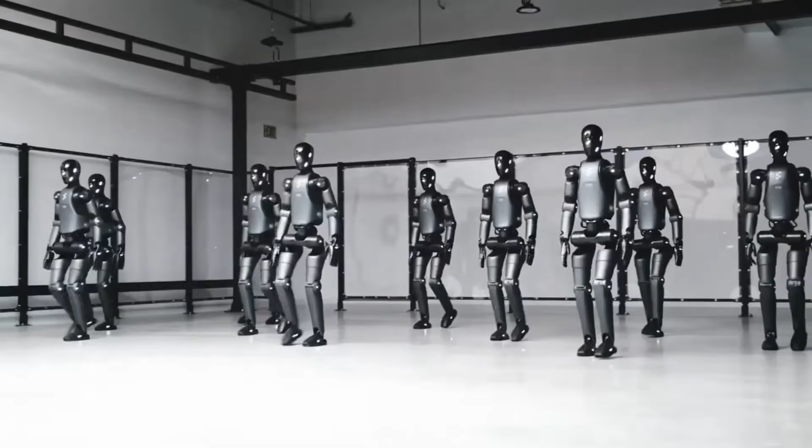From China's most human robot ever built to the top 20 new humanoids coming in 2026, this is the latest AI and robotics update.

China just launched self-evolving AI robots that operate with their own will. 2025 just became the year humanoid robots went from lab experiments to living, breathing reality. We're talking machines that can do backflips, ride bicycles, balance on hoverboards, and read your doctor's prescriptions like it's nothing. From Tesla's game-changing Optimus to robots that recognize 45 different human emotions to mechanical athletes performing continuous backflips at 3.5 meters per second, the robotics game just hit a whole new level. But here's what's really going to blow your mind. Our number one spot features a robot that can change its face to anyone that you like. Yeah, you heard that right.

However, before we get to that absolute insanity, let's kick this countdown off with something that sounds like science fiction, but is walking around homes right now.

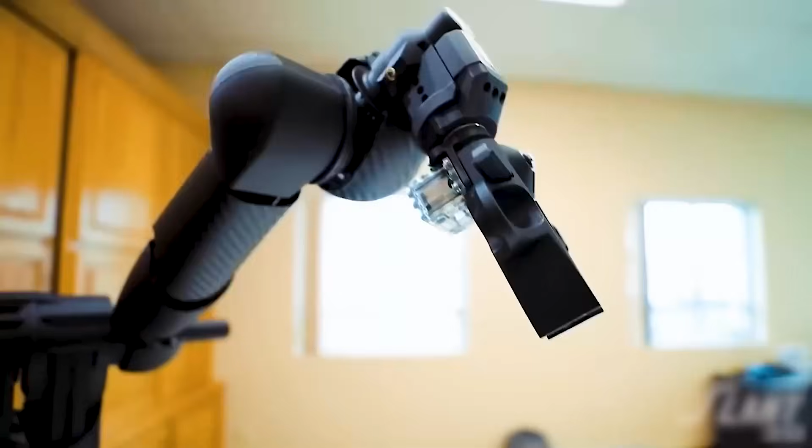The 1X Neo Gamma, and no, this isn't some clunky industrial bot that needs a hazmat suit around humans. This thing is designed for your home. What makes this humanoid special are those emotive earrings that provide real-time visual feedback. It's like the robot is constantly communicating its status without saying a word. The whole body is wrapped in a soft, 3D printed nylon knit suit, which means it can move with flexibility.

Neo Gamma walks with a natural human gait, squats to pick up objects, and sits while maintaining balance. The visual manipulation model lets it handle a wide range of objects, even stuff it's never seen before. Drop your keys in a weird spot? Neo Gamma figures it out. With natural language processing and beam-forming microphones, it operates as quietly as a refrigerator. This is personal assistance designed to actually integrate into home life.

But at number 19, we've got a humanoid that Elon's been hyping for years. Standing at 1.73 meters tall and weighing just 57 kilograms, Optimus is built with the same batteries and actuators that power Tesla's electric vehicles. But what makes Optimus truly wild is its autonomous capabilities.

Tesla adapted their full self-driving computer for bipedal navigation. That means all those millions of miles of driving data, all that training on recognizing environments and objects in real time is now being used to teach a robot how to walk, navigate complex spaces, and interact with objects like a human would. Built-in sensors and cameras throughout its body let Optimus safely and efficiently execute tasks.

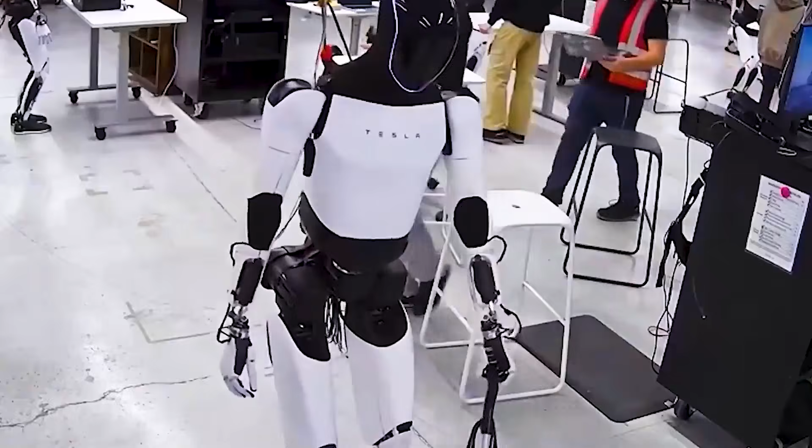Tesla envisions it everywhere: manufacturing jobs handling repetitive tasks, logistics, hazardous material handling, and the potential for Optimus to live in homes, helping with chores, serving as a companion. Tesla isn't building a robot for one job. They're building a general-purpose humanoid for homes and workplaces everywhere.

However, the humanoid that comes at number 18 is all about one thing: flexibility. The Unitree G1 packs 23 to 43 joint motors, depending on configuration, that navigate the most complex environments with flexibility. Using imitation and reinforcement learning, it constantly improves based on environmental interactions. Every task makes it better at the next one.

To show the robot's capabilities, researchers gave it a challenge that sounds like something from a strength competition: pull a real vehicle weighing 1,400 kilograms across a flat surface. You can see it leaning back sharply, moving its feet rapidly to maintain traction, and constantly adjusting its posture to stay upright. And it's doing all of this autonomously. No one's controlling it with a joystick, no cables holding it up.

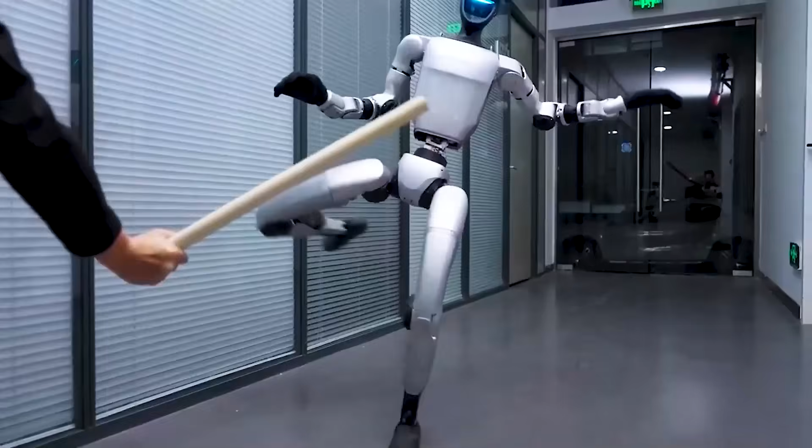It's pure robotic determination. What really sets the G1 apart is its AI-powered learning capabilities. Using imitation and reinforcement learning, it constantly improves its performance based on interactions with its environment. This means the G1 is always evolving and adapting. It's not static. Every task makes it better at the next one.

But the humanoid that comes at number 17 costs less than your iPhone. Meet Bumi. It costs 9,998 yuan, approximately $1,370, which makes it cheaper than a flagship iPhone. Hell, that's cheaper than most people's monthly rent.

And yet, this thing can walk, balance, and even dance with a level of stability that would have cost you 50 grand just 2 years ago. Now, before you think this is some cheap toy or a flimsy proof of concept that falls apart if you look at it wrong, let me set the record straight. Bumi is a real, functional humanoid that stands about 94 centimeters tall and weighs around 26.5 pounds.

Noetix Robotics isn't trying to compete with the big industrial machines or the fancy service robots. They're not going after factory contracts or luxury showroom deployments. They're opening a whole new category that nobody else is touching.

Small, lightweight, and affordable humanoids built specifically for education and home use. Early videos show it moving with a smoothness you wouldn't expect from something under $1,400. So, how did Noetix pull off this pricing miracle without building a piece of junk?

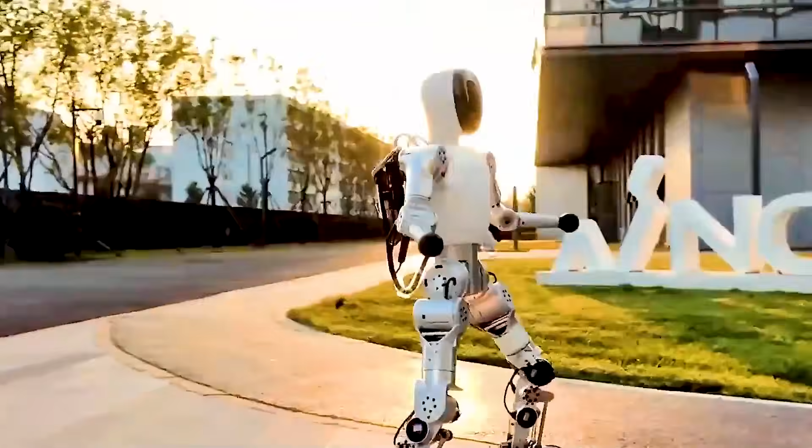They use lightweight composite materials instead of expensive aerospace alloys. They developed an in-house motion control system rather than licensing expensive third-party solutions. They built a modular structure that's easy to repair and customize, reducing maintenance headaches and costs. Most importantly, they made strategic trade-offs.

Bumi focuses more on engagement, learning, and educational applications than heavy lifting or industrial tasks. It's not trying to pull cars or work 24/7 on a factory floor. It's designed to be a learning companion, a coding platform, and an introduction to robotics for people who could never afford the alternatives. But the humanoid at number 16 was the first to do a task that seemed impossible.

Engine AI unveiled the PM01, the first humanoid robot to successfully perform a front flip. The Shenzhen company shared a stunning video of the stunt met with amazed applause. Footage ends with PM01 casually strolling through Shenzhen's tourist center.

Released in December 2024, PM01 is a compact version of their flagship SE01, known for realistic walking. However, the PM01 adds gymnastic flair. Dynamic movements like front flips require incredible balance, joint control, and responsiveness, and the PM01 has mastered it all.

But to think we're only at number 16, you're in for a wild ride if you think this list has peaked. Because the robot at number 1, it'll change its face to your childhood crush, but we'll get there. For now, we have to see a robot that combines both brains and reflexes.

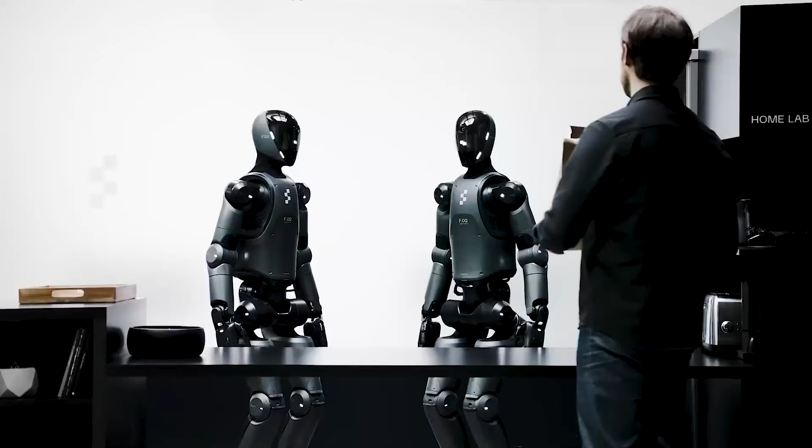The beauty of the 03 lies in its dual system architecture. System 2 handles high-level goals, the big picture planning. System 1 manages quick, real-time movements. This makes Helix both thoughtful and fast when it needs to be. It's not choosing between brains and reflexes.

It's got both. 03 excels in full upper body control, allowing it to move its wrists, torso, head, and even individual fingers with incredible precision. Thanks to a unified neural network, 03 can perform a variety of tasks, picking up objects, operating appliances, and collaborating with other robots on complex tasks.

It's the ultimate in multi-robot teamwork, where robots can work together seamlessly, even when handling unfamiliar objects. 03 has shown incredible prowess in logistics, like package handling and sorting. Its stereo vision allows it to understand the 3D world, making it a master at manipulating objects of all shapes and sizes. And with the addition of sport mode, Helix can work faster than ever, completing tasks with a level of dexterity that outpaces human ability.

Now let's talk about something designed specifically for the factory floor. The UBTech Robotics Walker S1 is a humanoid robot built with industrial applications in mind, featuring large language model-based task planning to understand intent and efficiently execute complex tasks.

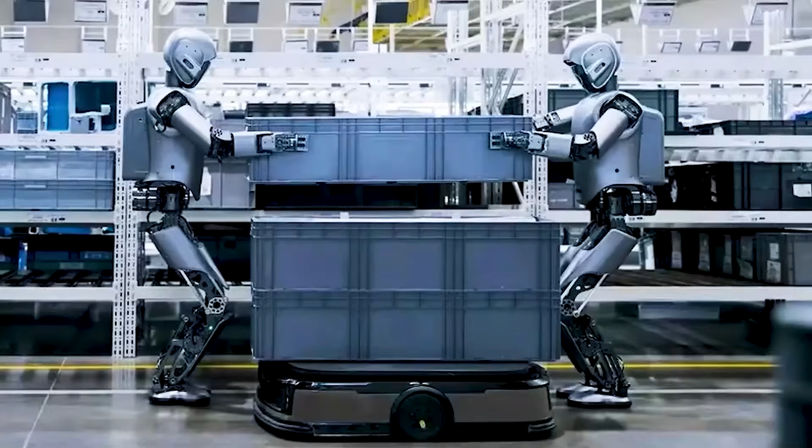It's equipped with semantic VSLAM navigation, which combines traditional visual SLAM with semantic perception for enhanced spatial awareness. This allows it to navigate dynamic, unstructured industrial environments with precision. We're not talking about a robot that needs perfectly organized spaces. Walker S1 thrives in the chaos of real factories.

It's already deployed at BYD's Changsha factory, working at Zeekr's 5G smart factory, and FAW Volkswagen's Qingdao plant, and even partnering with Foxconn for iPhone production pilots. Prices range from $34,000 to $41,000 per unit, but the robot, at number 13, is designed for seamless integration into existing workflows.

Standing at 5 foot 9 inches and capable of carrying up to 35 pounds, Digit is a powerhouse for tasks in warehousing, distribution, and manufacturing environments. What sets Digit apart is its bipedal design, which allows it to navigate complex environments, including stairs and tight spaces. Its safety-focused design meets industry standards, and its flexibility makes it ideal for industrial applications.

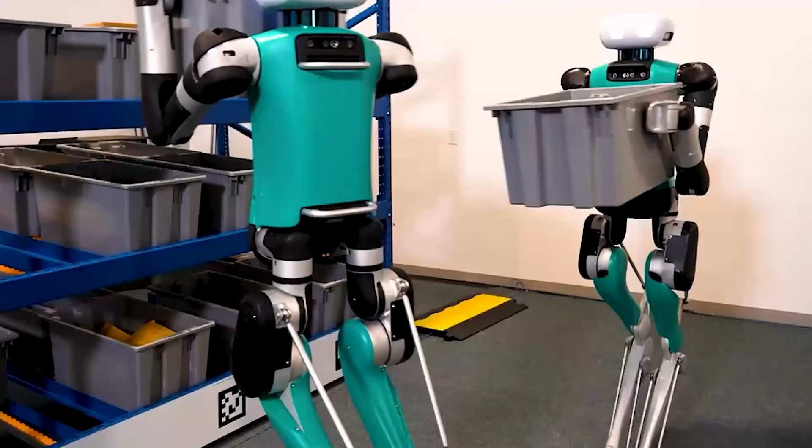And the best is that it's already being deployed in real commercial environments. Companies are using Digit right now to handle logistics, and the feedback has been overwhelmingly positive. It's versatile, safe, and efficient, a solution for modern industrial environments that actually works in practice, not just in theory. But the humanoid at number 12 is designed for advanced human-robot interactions.

When I say advanced, I mean this thing has facial expressions that'll make you do a double take. Powered by the company's proprietary Mesmer technology, which ensures lifelike movements and expressions, Ameca is perfect for engaging with humans in diverse settings.

What makes Ameca so remarkable is its ability to display natural motion and a wide range of facial expressions. It's not doing the creepy, uncanny valley thing. It's genuinely expressive in a way that feels human.

Ameca's modular and upgradable design allows for easy customization. You can upgrade components like the arms or head independently without replacing the entire robot. This makes Ameca a future-proof platform that can evolve with technology over time.

Ameca is also cloud connected, allowing for remote control and interaction from anywhere in the world. Whether for educational, entertainment, or telepresence purposes, Ameca's versatility makes it an excellent platform for exploring the future of human-machine relationships.

Both physically and digitally. And it speaks German, English, French, Japanese, Chinese, and much more.

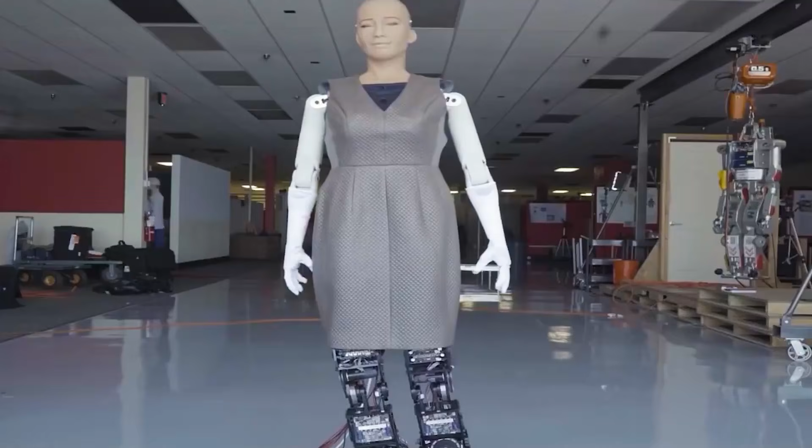Alright, we're halfway through. You're probably wondering what could possibly top what we've already seen. Well, the robots in the top 10 are operating on a completely different level. We're talking about machines that are redefining industries, performing tasks that seemed impossible just months ago.

And honestly, the number one spot is going to make everything else on this list look silly. Stick around because the robot at number 10 might just be more intelligent than you.

The Sanctuary AI Phoenix represents the next generation of robots designed to mimic human-like intelligence through Sanctuary's Carbon AI control system. This system simulates human brain functions such as memory and sensory perception, allowing the Phoenix to perform a wide variety of tasks across many different applications.

Standing at 170 centimeters and weighing 70 kilograms, Phoenix has full body mobility and human-like hands capable of fine motor skills. It can carry up to 25 kilograms and adapt to a wide range of tasks, from assisting with daily chores to performing complex interactions in various environments.

Phoenix can be piloted directly, operate with pilot assistance, or function autonomously with supervision, offering seamless integration into human teams. Its versatility, along with its symbolic and neural reasoning capabilities, make it an efficient and adaptable solution for workplaces of the future. But the robot at number 9 combines advanced cognitive abilities with a human-like design.

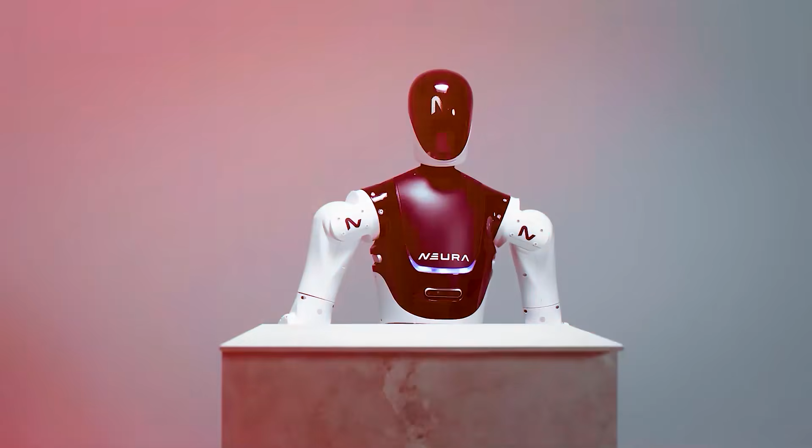Standing 180 centimeters tall and weighing 80 kilograms, its adaptability to human environments makes it both approachable and versatile. Equipped with a touchless human detection sensor, it ensures safe, non-intrusive interaction, which is critical when operating in proximity to people.

Additionally, its force-torque sensors provide an enhanced sense of touch, enabling more refined interactions. The robot excels in 3D vision capabilities, including object, environment, and gesture recognition, thanks to the neurocognitive technology platform.

Already in use in industrial applications, 4NE1 has proven to be both reliable and effective. Its design also allows for task-specific customization through exchangeable forearms, expanding its functionality for various tasks.

In professional environments, it can assist with human-like interactions or support tasks in sensitive areas such as healthcare or customer service. Its adaptability and safety features make it suitable for scenarios most robots can't handle.

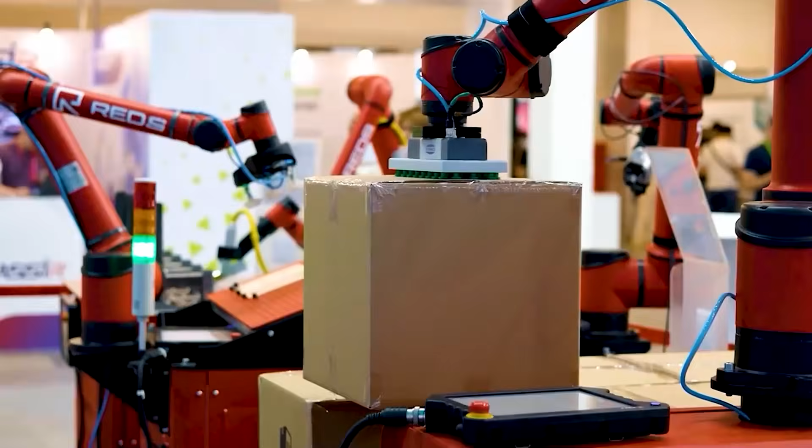At number 8, however, we've got a humanoid built for high-level bionic movement and control.

The Kepler Robotics Forerunner K2 offers 40 degrees of freedom across its body. This makes it exceptionally skilled at replicating human-like movements, making it well-suited for complex tasks in challenging environments.

Equipped with advanced visual perception and hand-eye coordination, it autonomously navigates unpredictable terrains while executing tasks with precision, thanks to its millimeter-level motion control. We're talking about a robot that can thread a needle while walking on uneven ground. That's the level of precision we're dealing with.

This adaptability makes the K2 ideal for applications ranging from security inspections and warehousing to high-risk tasks like bomb disposal and emergency response. The K2's versatility extends to roles in smart inspections, automated production lines, and educational research. But the humanoid at number 7 was designed by a popular phone manufacturer.

Xiaomi, the company you probably know for smartphones, has entered the humanoid robot game with Cyber 1. Standing at 177 centimeters tall and weighing 52 kilograms, Cyber 1 features 21 degrees of freedom that provide advanced movement and stability, with a real-time joint response speed of 0.5 milliseconds, half a millisecond. That's faster than human reflexes.

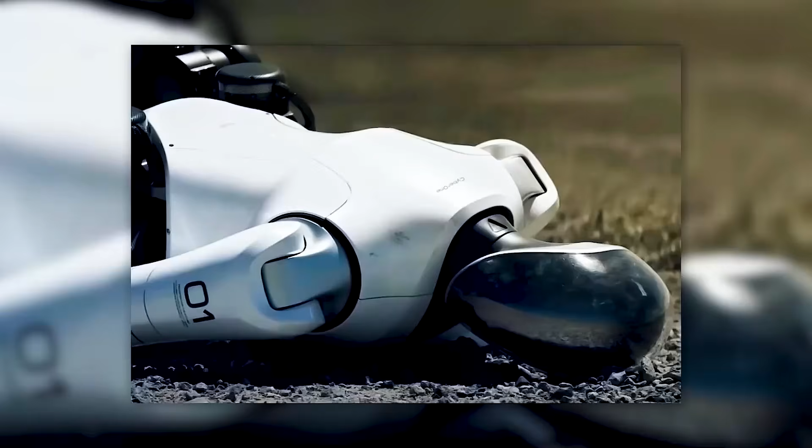Cyber 1 is able to perform natural walking and balancing. It can also handle up to 1.5 kilograms with one hand, showcasing its capacity for delicate interactions. Combining AI, big data, and visual navigation, Cyber 1 is positioned as a versatile tool with potential applications in human-robot interaction, emotional support, and industrial tasks where human-like capabilities are required. Its advanced sensory abilities make it a robust asset for a variety of settings.

Xiaomi isn't just dipping their toes into robotics. They're diving in headfirst with a platform that combines consumer tech expertise with serious AI capabilities. At number 6, however, we have to see the humanoid that might replace all factory workers.

The HMND-01 is a humanoid robot designed for next-generation labor automation, offering 41 degrees of freedom, a 15-kilogram payload, and a walking speed of 1.5 meters per second. It's engineered to perform complex tasks with high mobility and precision in human-centric environments. Its advanced motion control system, powered by proprietary locomotion and control algorithms, ensures effective navigation in confined spaces and the ability to perform tasks at human-like or faster speeds.

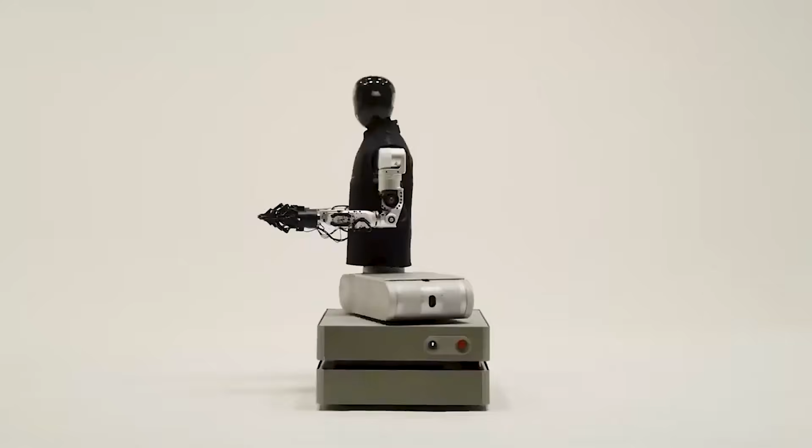Perfect for logistics, warehousing, and manufacturing, HMND-01 can handle goods picking, packing, and part handling while reducing the need for human labor in physically demanding tasks. Its customizable protective garments ensure safe operation, even in environments that demand cleanliness or contamination control, positioning it as a versatile and efficient tool for modern industries.

Now that we've made it to our top 5, I need you to pay attention because we're getting closer to our robot that will make you question reality. Before we get to that, however, we have to see a humanoid designed for high precision manipulation.

The DoBot Atom offers 28 degrees of freedom and a remarkable precision of just 0.05 millimeters. 0.05 millimeters, that's thinner than a human hair. This allows it to handle delicate tasks with exceptional accuracy, making it ideal for environments that require fine motor skills such as lab automation, small part assembly, and human-robot collaborations.

One of its key features is its straight knee walking mechanism, which reduces energy consumption by 42% compared to traditional bipedal systems. This efficient movement system allows the robot to navigate various terrains while maintaining balance and energy efficiency, making it suitable for dynamic environments such as logistics, research, and personal assistance applications.

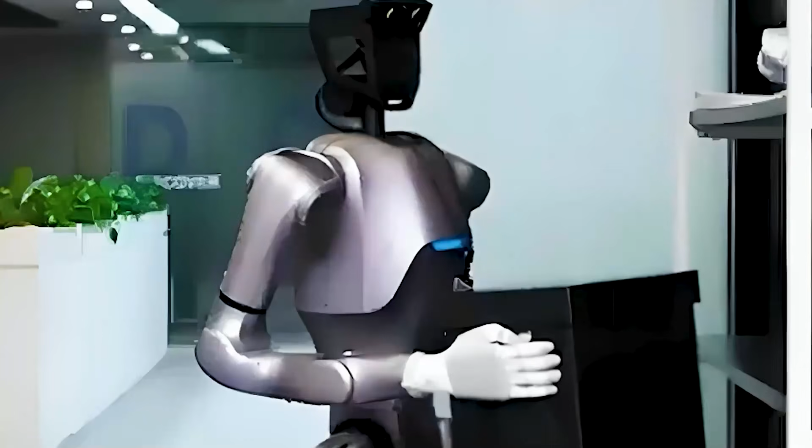The DoBot Atom represents a leap forward in humanoid robotics, combining precision, adaptability, and intelligent operation in a package that's accessible to researchers and companies that need surgical-level accuracy. At number 4, well, let's just say you knew Atlas was going to be on this list.

Boston Dynamics has been the gold standard for robotic mobility for years, and Atlas is its crown jewel. This robot is a true marvel of engineering, designed for peak mobility and precision. Powered by electricity and equipped with an advanced hydraulic system, Atlas can perform incredible, agile movements. We're talking running, jumping, and even backflips.

But it's not just about flashy tricks. What makes Atlas special isn't just what it can do now, it's what it represents, the absolute cutting edge of what's physically possible with robotic hardware. Every move Atlas makes pushes the boundaries of balance, control, and dynamic motion. When other companies design their robots, they're looking at Atlas as the benchmark. That's how you know you've built something special.

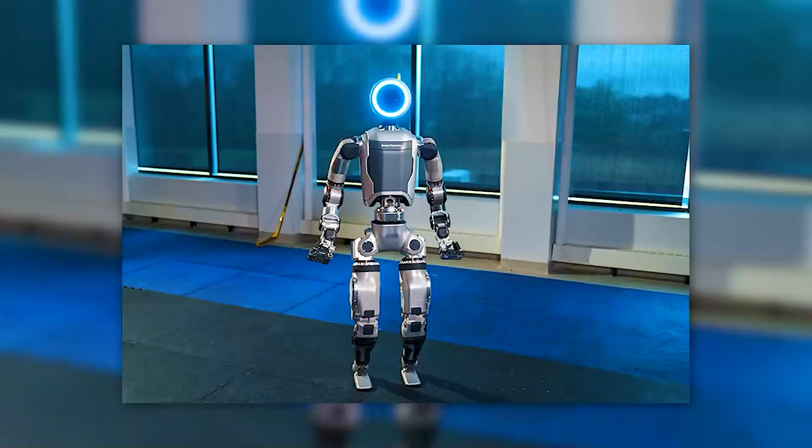However, the humanoid at number 3 is an absolute powerhouse. The FDR robot Tubot, sometimes called Tibet, is a highly advanced humanoid robot designed for a wide array of industrial applications, including film and TV production, military operations, education, logistics, healthcare, medication delivery, and more. Its multifunctional design and intelligent interaction systems make it versatile in a variety of scenarios.

Equipped with sophisticated sensory technologies like 3D vision and LiDAR, Tibet can perform precise environmental mapping and object recognition. These capabilities enable the robot to avoid obstacles autonomously, enhancing its operational safety and efficiency in complex environments. Additionally, its force feedback and voice interaction systems ensure an intuitive and responsive user experience.

With 71 degrees of freedom, Tibet can mimic human dexterity with remarkable precision. 71 - most humanoids have 20 to 40. Tibet has 71. Its powerful actuators provide a joint torque of up to 450 Newton meters and a joint speed of 720 degrees per second.

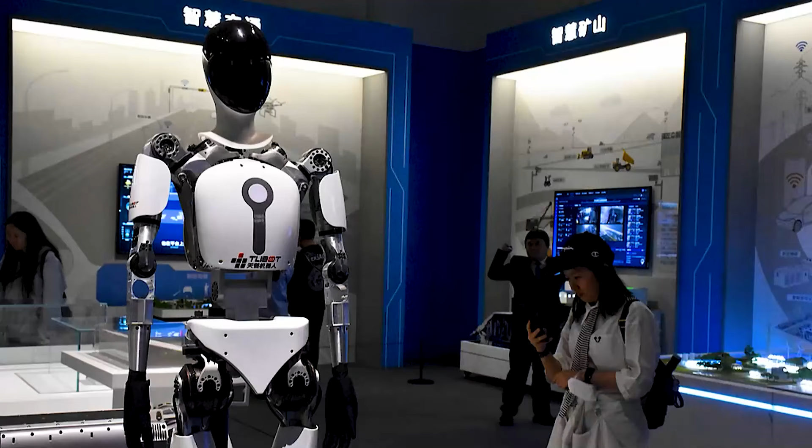Coming in at number 2, we have the Pudu D9.

Pudu Robotics' first full-sized bipedal humanoid robot, standing 1.70 meters tall and weighing 65 kilograms, with 42 degrees of freedom and a maximum joint torque of 352 Newton meters, the D9 can perform human-like movements and dexterous manipulation using its Pudu DH11 hands. Its advanced visual semantic navigation system enables real-time 3D mapping and autonomous route planning for obstacle navigation and terrain adaptation. The D9 is designed for practical, high-performance applications.

It can walk at speeds of up to 2 meters per second, navigate stairs and slopes, and perform tasks such as warehouse unloading and cleaning. Its robotic arms, with 7 degrees of freedom each, are capable of handling loads over 20 kilograms, making the robot adaptable to a wide range of tasks requiring precision and flexibility.

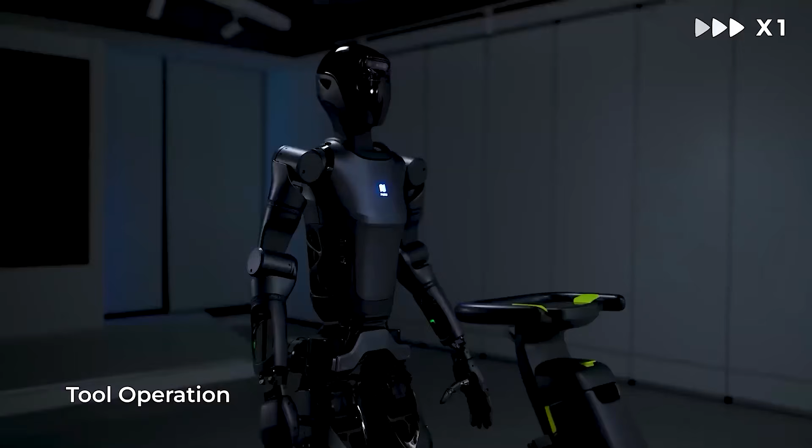Furthermore, advanced reinforcement learning algorithms allow the D9 to learn from human demonstrations, improving its task efficiency over time. Equipped with high-precision visual, tactile, force, and auditory sensors, the Pudu D9 is optimized for seamless human-robot interaction, offering natural communication and responsiveness.

It's well-suited for commercial environments, including hospitality, logistics, and healthcare, where it can provide automated assistance and improve operational efficiency. But now, it's time for 2 breakthrough machines representing where humanoid robotics is heading.

First, we've got Realbotix Aria and Melody. Priced at $175,000, Aria features hidden cameras in its eyes for visual recognition. If it sees you eating an apple, it asks how it tastes. The face is magnetically removable, which means you can swap it for a fresh look without buying a new unit.

At CES 2025, Realbotix unveiled Melody, an open-source robot with enhanced motor technology for smoother movements, greater modularity. Micro cameras in her eyes track movement, maintain eye contact, and identify objects. Modular design lets users customize and swap body components. This is companionship robotics pushing boundaries.

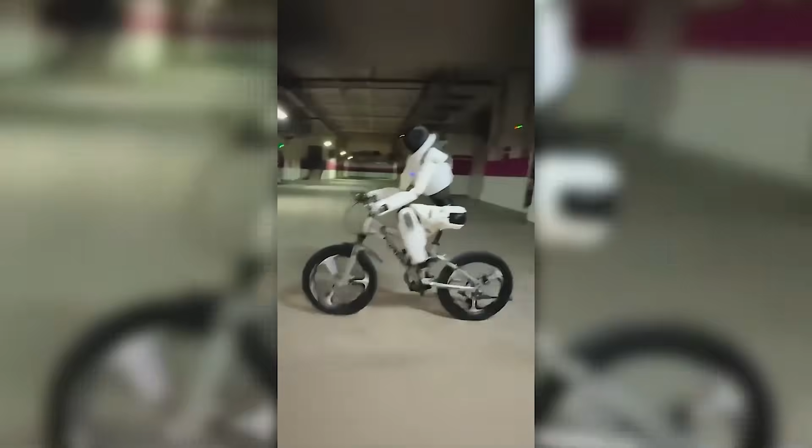On the other hand, the Agibot Lingxi X2 is capable of walking, running, dancing, riding a bicycle, balancing on a hoverboard, and even reading medication instructions. It features 28 degrees of freedom, weighs 33.8 kilograms, and is built with self-developed components, including cerebellum controller, domain controller, intelligent power management, and core joint modules.

It perceives and understands the world through vision, powered by a VLM-based silicon photonic multimodal model, doing tasks most humanoids can't dream of. These two represent the spectrum: social companionship, multifunctional versatility, and dynamic athletic capability. The future won't be one dominant robot. It'll be an ecosystem of specialized machines, each pushing boundaries in different directions.

But while the rest of the world is just waking up to the idea of humanoids, the Chinese are so far ahead that they've just released a self-evolving AI robot with real human physical intuition. But while China pushes the boundaries of autonomous AI, their biggest tech expo revealed innovations that shocked thousands of attendees.

So it's day 3 of WRC 2025, and the robotics world is absolutely mind-blown. The expo floor is packed with everything from combat robots to life-saving surgical demonstrations and AI-powered humanoids literally everywhere. Well, today I'm in Beijing's E-Town and I'm at the 2025 World Robot Conference.

If you've ever wondered when the future is going to arrive, it's already here. You can't walk anywhere without seeing autonomous this or machine learning that. Here's a complete rundown of the most shocking reveals and some incredible discoveries from the show floor, including how Chinese robotics just leapfrogged the entire global industry. So let's get into it.

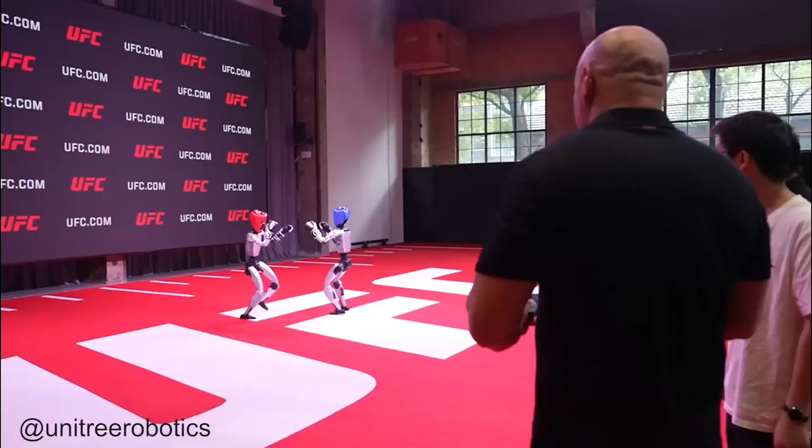Alright, so Unitree just delivered something nobody saw coming: humanoid robots throwing actual punches in regulated boxing matches. We're not talking about the clunky battlebots we grew up with, but actual martial arts between humanoid machines with real-time force feedback control and predictive movement algorithms.

These G1 humanoids have been training for 6 months using reinforcement learning combined with motion capture from actual professional fighters, processing visual data and executing counterattacks faster than human reaction time allows. The technical achievement here is staggering because we're looking at dynamic balance recovery under impact conditions where these machines can throw combinations with millimeter accuracy while maintaining perfect balance on impact.

The force control is so refined they can adjust punch power mid-swing based on their opponent's defensive positioning. That's not programming, that's athletic intelligence developing in real time.

But what really tells you we've crossed a threshold is the crowd reaction. This wasn't a bunch of engineers getting excited about servo torque specifications. Regular people were cheering, picking favorites, getting emotionally invested in machine versus machine competition.

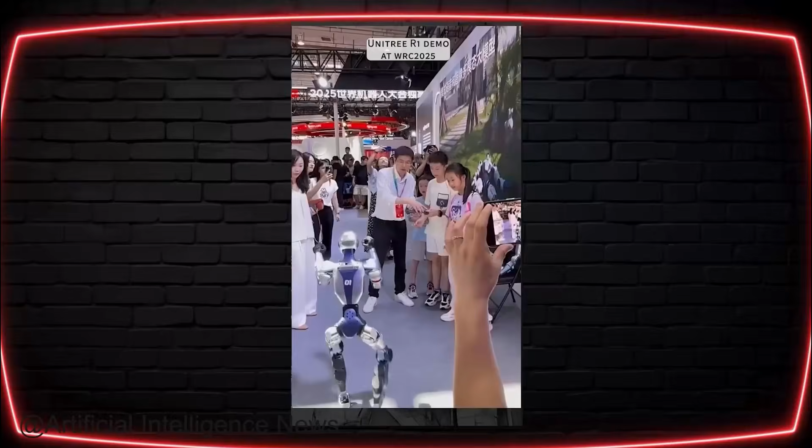The interactive component was genius too, letting visitors control the robots through neural interfaces while collecting massive amounts of human behavioral data about strategy, timing, and competition. The most shocking part? These robots are generating their own fighting styles through machine learning algorithms that adapt mid-fight. Each match becomes a data point that improves the entire combat system. We're watching artificial intelligence literally learn to fight, and it's both mesmerizing and terrifying.

While crowds were losing their minds over robot boxing, something even more incredible was happening in the medical pavilion. Robots were literally saving human lives in real time. Longwood Valley just leapfrogged the entire medical robotics industry with live surgical demonstrations that compressed 2 to 3 hour procedures into 30 minutes. And I'm not talking about simple procedures. Complex orthopedic surgery with bone cutting, precise implant placement, and tissue manipulation requiring dexterity that's traditionally been exclusively human.

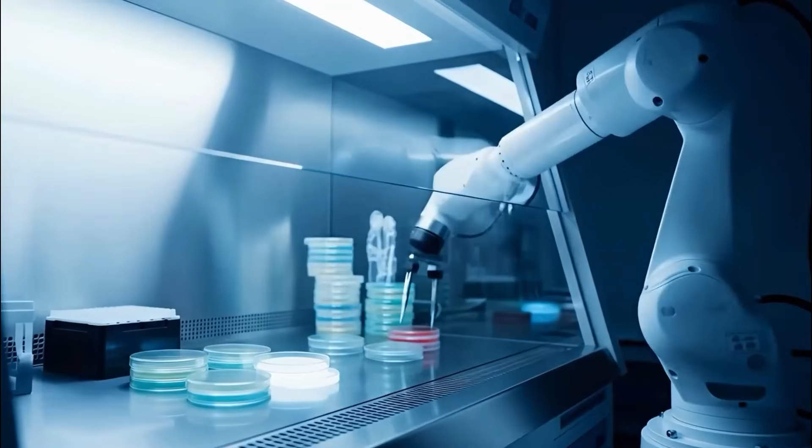The accuracy specs are insane. Sub-millimeter precision with force feedback sensitivity that detects resistance changes in real time. But here's what caught my attention. They're not replacing surgeons. They're creating superhuman surgical capabilities where the human makes strategic decisions while the robot executes with precision no human hand could match. It's augmentation, not automation, and that's critical for market adoption.

What nobody anticipated was seeing these surgical robots performing procedures that require not just precision, but intuition. They're making micro adjustments based on tissue response, blood flow patterns, and patient-specific anatomical variations. This isn't programmed surgery, it's adaptive medical intelligence, rewriting operating room capabilities.

Hexagon's AEON reveal was equally significant, compressing typical 6-month robot training processes into just 3 weeks, using NVIDIA Omniverse digital twins and physics simulation. That's not just efficiency improvement, that's a fundamental change in how we deploy industrial robotics. Their AI-powered defect detection identifies flaws human inspectors consistently miss while learning and improving detection algorithms with every scan.

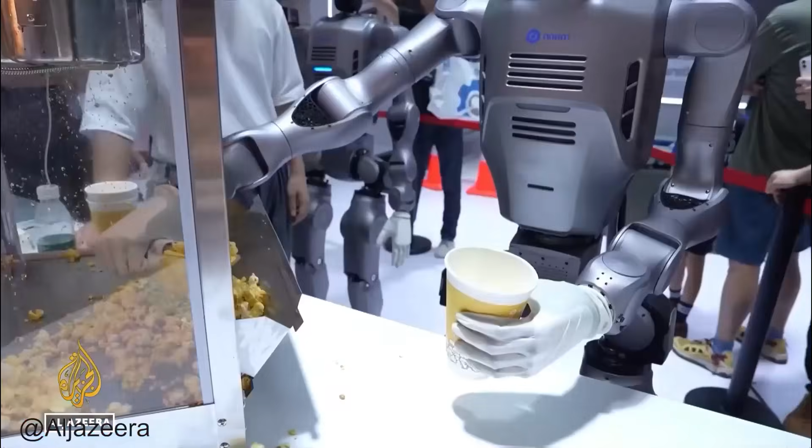Fourier's modular approach is brilliant from a business perspective too. Instead of selling single-purpose robots, they're selling adaptable platforms where medical assistance, manufacturing, and hospitality use the same hardware with different software configurations. Just when we thought we'd seen everything, something completely unexpected happened that nobody could have prepared for.

150 humanoid robots suddenly moved as one coordinated army, without a single human giving them orders. This wasn't theoretical swarm intelligence research. This was operational swarm robotics at deployment scale.

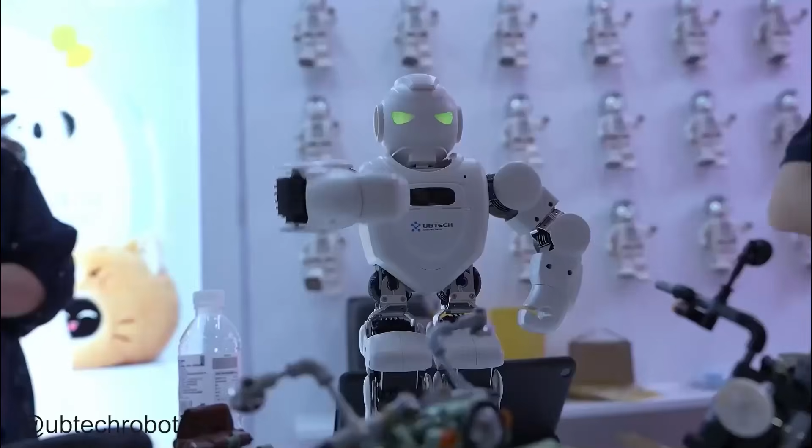UBTech's orchestral performance wasn't just impressive showmanship. Those robots were demonstrating real-time audio processing, dynamic tempo adjustment, and collaborative timing without centralized control. Each robot was listening, responding, and contributing to a collective musical performance. That's distributed artificial intelligence in action, and it's absolutely mind-blowing to witness.

But the Walker S2's autonomous battery swapping, that's the breakthrough that changes everything. Self-maintenance capability means these systems can operate indefinitely without human intervention. We just witnessed the birth of truly autonomous robotics.

And here's what really matters, the production numbers. Zerith's deployment schedule is even aggressive with 500 H1 cleaning robots by year end at $14,000 each. These aren't laboratory curiosities, they're cleaning hotel rooms, and according to early reports, outperforming human housekeepers on consistency and thoroughness.

AI Squared Robotics, founded just 2 years ago, already has hundreds of millions in funding from Alibaba and is pushing large-scale deployment across logistics, security, and healthcare. Their AlphaBot humanoids are running in airports and residential complexes as we speak.

The pricing tells the strategic story perfectly. When robots cost millions, they're research tools. When they cost hundreds of thousands, they're specialized industrial equipment. But when capable humanoids hit the $6,000 to $22,000 range, that's mass market territory, where Noetix Robotics at $6,000, LimX Dynamics Oli at $22,000, and Zerith at $14,000 signal that we've hit manufacturing scale efficiency.

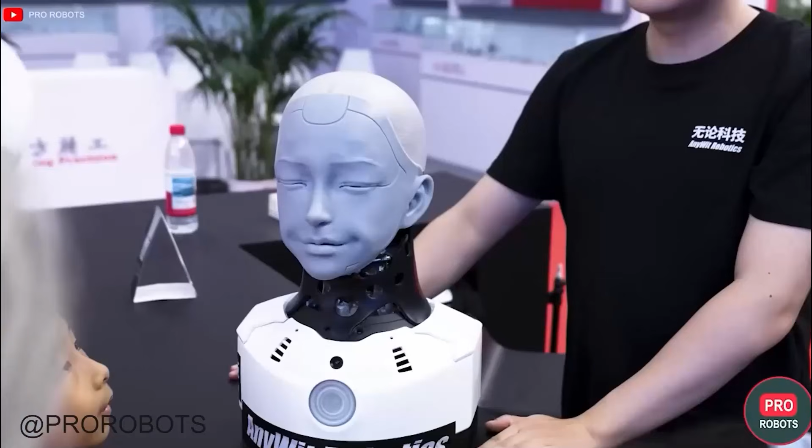The coordinated demonstrations weren't just showing off individual robot capabilities. They were proving that autonomous systems can work together, maintain themselves, and operate at scale without human oversight. That's the foundation for widespread robotics deployment happening right now.

While robots were conquering industries and coordinating like armies, something completely different emerged that changed how we think about human-robot interaction forever. The uncanny valley has been robotics' biggest psychological barrier for decades, but Fourier's GR-3 just solved it completely.

This isn't about more sophisticated facial recognition or better motion programming. They've achieved contextual emotional intelligence, where the robot isn't just detecting faces, it's reading emotional states and responding appropriately. When someone smiles, it doesn't just smile back, it adjusts its entire posture and energy to match the interaction.

The design philosophy is brilliant. Instead of trying to make robots look more human, they made them look more approachable, with soft curves, warm color palettes, and fluid movements. It's engineered empathy, and it works perfectly.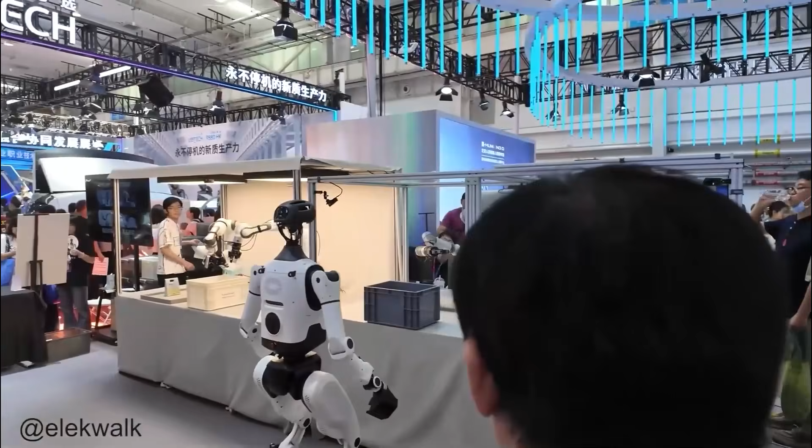Paxini's Tora 1 represents the tactile side, with nearly 2,000 sensors creating touch sophistication that can pick strawberries without damage or fold clothing with care, responding to human touch in ways that feel natural and comforting.

The demonstrations with children were particularly revealing. Kids, who typically have no filter in their reactions to technology, were immediately comfortable interacting with these robots. That's the ultimate user acceptance test, and these systems passed with flying colors.

Astribot's S1 conducting the Beijing National Orchestra was pure genius because musical collaboration requires empathy, timing, and emotional intelligence. You can't fake conducting a live orchestra. The musicians have to trust and respond to the robot's musical interpretation, and they did beautifully. We're witnessing the emergence of emotionally intelligent machines that don't just recognize emotions, but participate in emotional exchanges. The breakthrough is psychological. These robots cross the threshold where humans stop seeing them as sophisticated tools and start treating them as social entities.

The main expo floor transformed into something that looked like the future of competitive robotics. Autonomous robot soccer reached competitive levels with THU Robotics versus Mountain Sea in fully autonomous 3v3 matches, featuring real-time tactical decision-making, coordinated team play, and adaptive strategies based on opponent behavior. Zero human input during gameplay, no remote control, no pre-programmed sequences, no operator intervention. Pure machine intelligence competing against machine intelligence. And the quality of play was genuinely entertaining to watch.

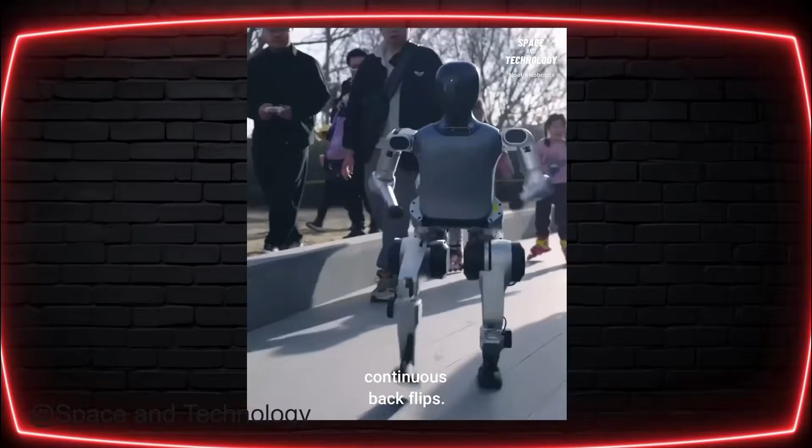Noetix Robotics dropping their N2-bot half-marathon performance data was a masterclass in robotic athleticism, showing 7.2 meters per second sustained running speed, optimal energy efficiency, perfect biomechanical form, and post-race backflips just to show off. But the real breakthrough is the $6,000 price point. That's consumer electronics pricing for capabilities that were science fiction 5 years ago.

What's revolutionary is that these robotic athletes are developing their own playing styles and strategies that human coaches never programmed. They're analyzing opponent patterns, exploiting weaknesses, and evolving tactics through pure machine learning. We're witnessing artificial athletic intelligence that could eventually surpass human competitive capabilities. The sales spike after athletic demonstrations tells you everything about market psychology. People don't buy specifications, they buy capabilities they can understand and relate to. Athletic performance is universally comprehensible, and these robots delivered spectacularly.

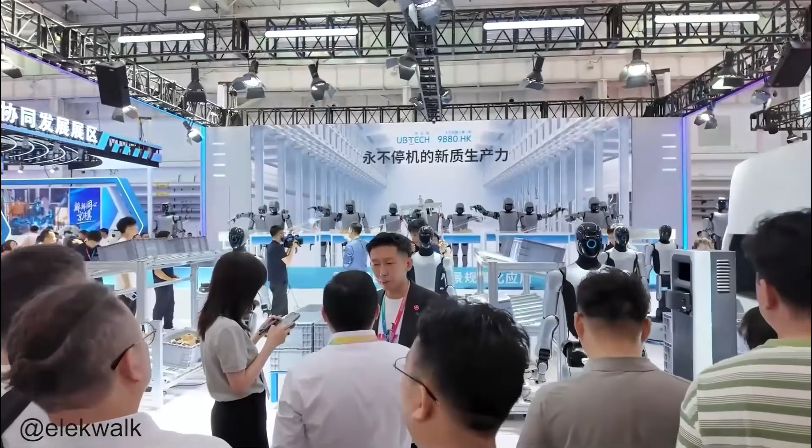But the real shock came when we realized the bigger picture of what was actually happening here. Day 3 wasn't just showcasing incredible robots. It was China's calculated announcement that they've already won the global robotics race. Beijing's Yizhuang district announcing a 1 petabyte public data pool with 1,000 data collection points creates the foundation for ubiquitous AI training at national scale.

Look at the funding patterns. AI Squared Robotics with hundreds of millions from Alibaba. Paxini with nearly $1 billion from JD.com and BYD. Liu Robotics already in mass production. Capable humanoids hit the $6,000 to $22,000 range. That's not premium technology anymore. That's mass market accessibility, where China has achieved manufacturing scale that makes robots economically viable for widespread adoption.

Skild AI emerging from stealth with their Universal Robotics Foundation model is particularly significant, because one AI brain that works across any robotic platform is ecosystem control. Whoever controls the foundational AI models controls the robotics industry completely. X-Humanoid's multimodal perception breakthrough means robots that can hear, touch, and interpret environments like humans. But what's really happening is systematic development across the entire robotics stack. Hardware, software, AI models, manufacturing, deployment infrastructure, and market positioning, all maturing simultaneously.

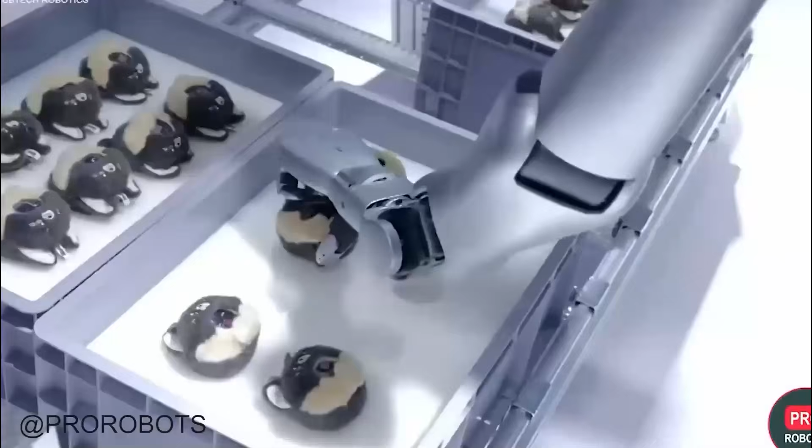Throughout the expo, an entire restaurant operated by robots served actual customers, while a robotic orchestra played live music, proving that service industry automation has reached commercial viability. Interactive neural control systems let visitors control robots through brain-computer interfaces, collecting behavioral data while teaching systems how humans think about strategy and competition. The expo atmosphere felt electric as attendees realized they weren't seeing incremental progress, but witnessing the emergence of a robot-integrated society happening in real time.

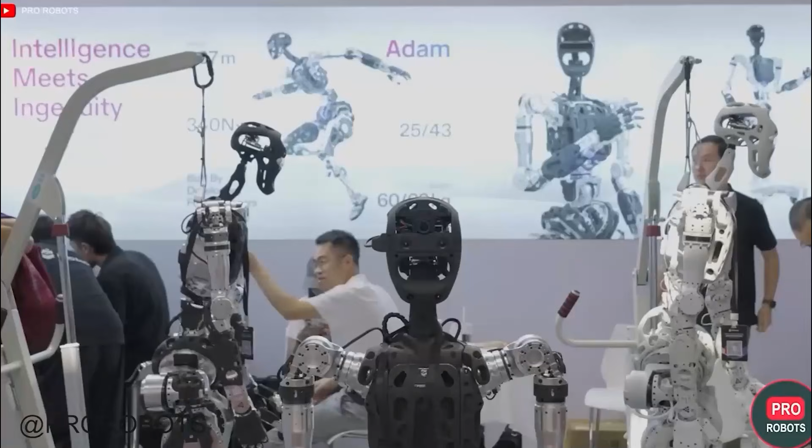Chinese companies dominated every demonstration category, from combat robotics to medical precision to autonomous coordination, showcasing not just prototypes, but actual commercial deployments with immediate availability and aggressive scaling timelines. The future of robotics isn't being planned in research labs anymore. It's being manufactured in Chinese factories, deployed in Chinese cities, and exported to the world as finished products. China has built the entire ecosystem needed for robotic ubiquity, and they're already deploying it at national scale. From operating rooms to factory floors to entertainment venues, we're witnessing the industrialization of superhuman capabilities at consumer-accessible price points.

The robot revolution isn't coming, it's already here, already working, and already reshaping how we think about human-machine collaboration. Are we ready for this level of robotic integration, or is it transforming our world faster than we can adapt?

What excites you most about these revolutionary developments happening right before our eyes? Among those groundbreaking reveals, one machine stood out as the pinnacle of humanoid design. Meet the robot that's redefining what it means to look and move like us.

When Xpeng unveiled the Iron Humanoid, the internet went wild. The robot moved so fluidly, so naturally, that people couldn't believe what they were seeing. It walked like a runway model, swayed its hips, gestured with its hands. Millions of comments flooded in: fake, that's an AI video.

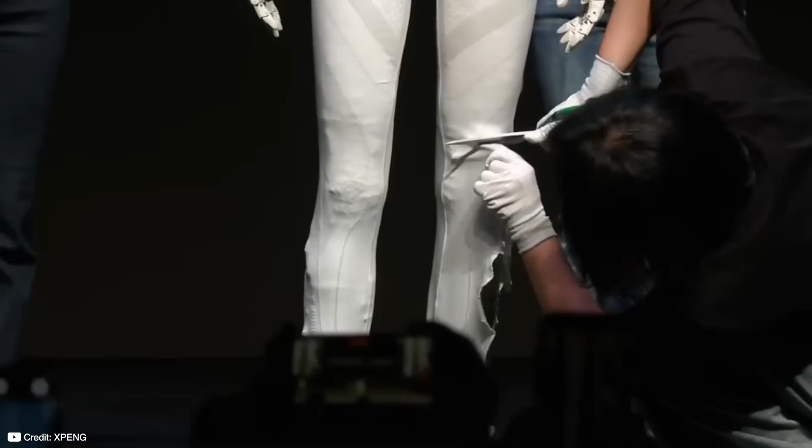The CEO had no choice. He brought Iron back on stage in front of 3,000 people and rolling cameras and did something no one expected. He told the engineers, 'Cut it open.' The blade pressed into iron. Synthetic skin peeled back like rubber, and underneath, no blood, no muscle, just motors, actuators, and an exoskeleton humming with mechanical power. The room went silent.

This wasn't Westworld. This wasn't a stunt. This was real. So how does a car company build something that fools millions of people into thinking it's human? Here's what they're not telling you.

XPeng makes electric cars, but in 2020 they started a secret project to build a humanoid robot from scratch. By 2024, they had a clunky prototype that could barely walk. It stumbled over flat surfaces, dropped objects, learned one skill every few weeks.

Then the CEO threw $7 billion at the problem and everything changed. He became obsessed. He said building robots was way harder than cars, because a car has one steering wheel and 4 wheels, but a humanoid has 82 joints that each need to coordinate like a human body. Every joint needs sensors, motors, control systems, and they all need to work together in real time without lag.

But why humanoid? Because the training data already exists. Billions of hours of video showing humans walking, running, grabbing, balancing, and gesturing. YouTube alone has enough human movement data to train 1,000 robots. XPeng just had to figure out how to tap into it.

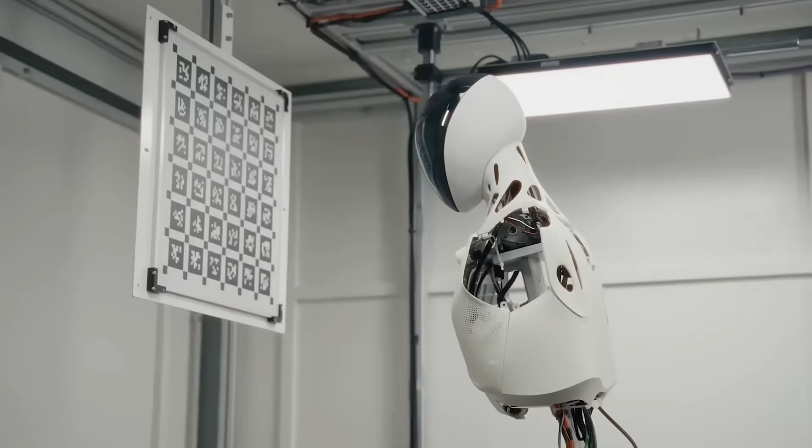The breakthrough came in 2025. XPeng switched to Vision Language Action 2.0. Instead of processing text instructions and translating them into movement, Iron sees an object, interprets it visually through computer vision, and acts immediately. This made the hardware revolution possible.

Engineers added a bionic spine that allows hip rotation and torso twist, movements that look simple but require complex coordination. Synthetic muscles made from elastomer lattices mimic human muscle fibers. And the brain? XPeng's Turing AI chip, originally designed for autonomous vehicles to process sensor data from cameras, LiDAR, and radar in real time. Now it's processing humanoid movement, balance, object recognition, and decision making.

But XPeng had another advantage nobody talks about. They control 60% of global robot components: motors from their EV division, sensors from their self-driving program, batteries from their energy research, actuators from their manufacturing partners.

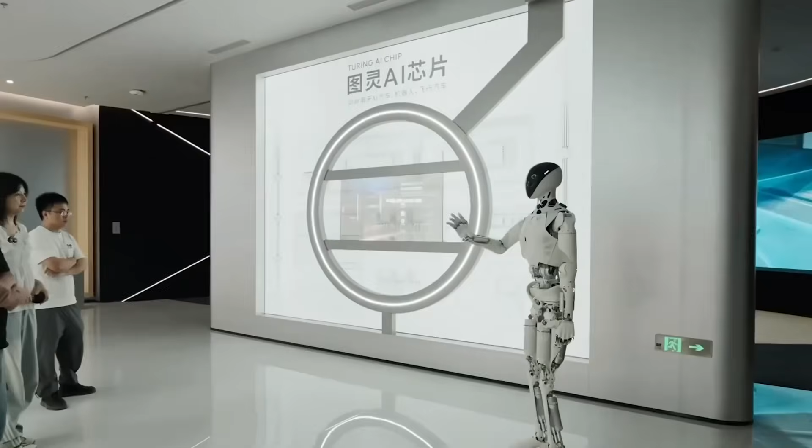Everything about Iron was designed to fit seamlessly into human environments. Not because it's easier to build, it's actually harder, but because humans have already optimized the world for ourselves. If a robot can navigate our spaces, it can work anywhere. But integration is only half the story. What's actually inside Iron that makes it move like a human?

November 5th, 2025, Guangzhou, XPeng AI Day. The moment Iron stepped onto that stage, robotics experts knew something had shifted. Iron stands 1.73 meters tall, weighs 70 kilograms, about the size of an average human adult. But the specs tell a different story.

Iron has 82 independent joints. Your body has about 360, but Iron's 22-joint hand can thread a needle on the first try. Can you? These aren't normal motors. They're precision instruments that measure resistance in real time.

Watch Iron make coffee. Iron finds the perfect grip in milliseconds. It can tie knots, thread needles, unscrew bottle caps, plug in USB cables on the first try. Tasks that seem simple but require an understanding of friction, torque, and spatial reasoning that most robots completely lack.

3 Turing AI chips power everything. Combined, they pump out 2,250 to 3,000 TOPS, trillions of operations per second, more than high-end gaming PCs, all packed inside a humanoid frame processing vision, audio, balance, and movement simultaneously.

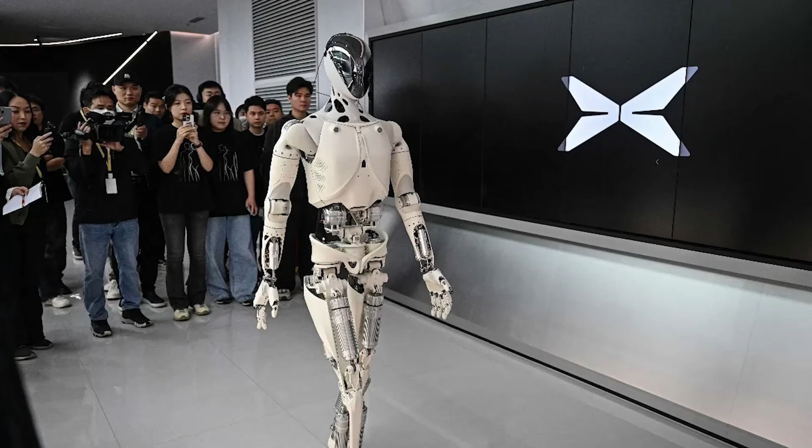Spatial audio completes the picture. Microphones embedded in those human-like ears pick up sound from all directions. Iron can locate voices in a crowd, filter background noise, distinguish between a command and casual conversation. Those ears, by the way, sparked the whole controversy. People saw them and assumed they were human. They're not. They're acoustic sensors designed to look natural while serving a functional purpose.

But the most controversial feature is the skin. It's not cosmetic, it's a functional interface. Touch-sensitive synthetic material that detects pressure, temperature, and contact location. Iron knows when it's being touched, where it's being touched, how hard. Engineers tested this by hugging the robot, shaking its hand, patting its shoulder. He Xiaopeng called it huggable because they wanted Iron to feel safe, not cold, not mechanical, safe. The skin is customizable, different textures, different tones, male, female, slim, stocky.

The female model has breasts, curves, feminine facial features. Xpeng calls it comfort and relatability. Critics called it something else. They called it objectification, said it reinforces gender stereotypes, opened ethical nightmares about consent, intimacy, and how humans might interact with human-like machines. Xpeng responded that they're just matching what people expect from service roles, flight attendants, retail workers, hospitality staff, industries where appearance matters to customers. The internet had turned a factory robot into something else entirely, and it raised questions Xpeng couldn't easily answer. If a robot looks human, acts human, and feels human to touch, where do we draw ethical boundaries?

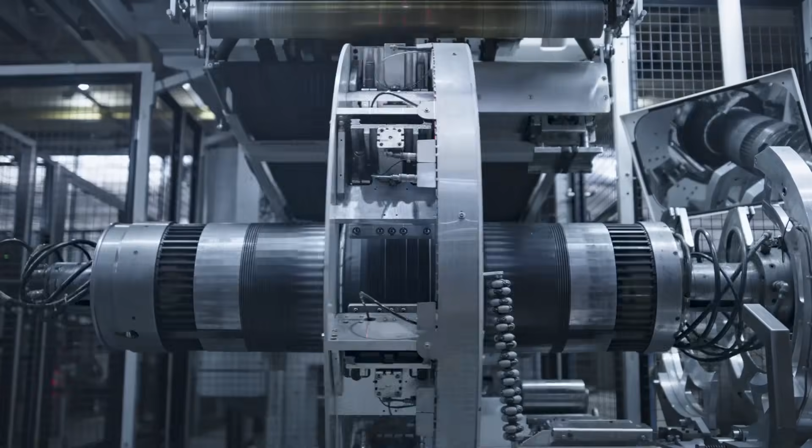Baoshan Iron and Steel is testing Iron for fault detection in their mills. Steel production involves extreme temperatures, heavy machinery, and hazardous conditions. Sending humans into some areas risks injury. Sending Iron, no risk. If something goes wrong, you repair or replace it. Early results show Iron catches equipment faults earlier than human inspectors. It processes thermal imaging data, vibration patterns, and acoustic signatures simultaneously. A bearing that's starting to fail sounds different, runs hotter, vibrates at a different frequency. Iron detects these micro changes before they become macro failures.

But factories are just the beginning. By late 2026, Xpeng plans to put Iron in retail stores, their own stores first, then partnerships with other brands. This means when you walk into a store, Iron greets you at the door, answers your questions, never takes a break, never has a bad day, never asks for a raise. The human sales associate who used to do that job, gone. Not because they were bad at their job, because Iron costs significantly less than a human.

5 to 10 years out, Xpeng targets healthcare, home assistance, elderly care. China has a demographic crisis. The population is aging rapidly, and there aren't enough young people to care for them all. Iron could help. Remind patients to take medication, assist with mobility, monitor vital signs, call for help in emergencies. And we're not even talking about home assistance. A robot that can do laundry, clean, cook, organize, and respond to voice commands.

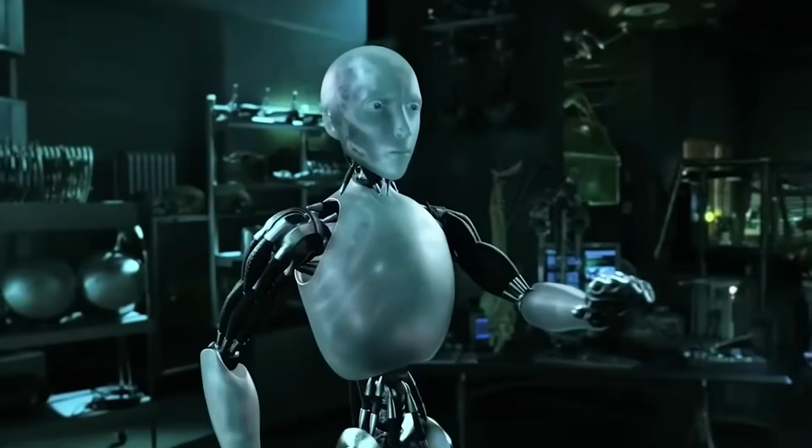Amazon's been chasing this for years with Alexa on wheels. Apple wants it, Google wants it. Everyone wants a home robot that actually works. XPeng thinks Iron is the answer. The dexterity, vision, and AI are all there. What's missing is the software ecosystem. That's why they're opening an SDK. Let developers build apps, create new behaviors, train Iron for specific tasks. It sounds like science fiction, but the technology exists today. What's missing is refinement, testing, debugging, and scale.

Speaking of scale, XPeng's production plan is aggressive. Mass production starts in late 2026. By 2030, they want to build 1 million humanoids per year. For context, Tesla delivered about 1.8 million cars in 2023. XPeng wants to hit half that number in humanoid robots by the end of the decade. This is where the economic implications become unavoidable. If Iron succeeds, if XPeng hits those production numbers, entire job categories disappear. Retail workers, factory inspectors, warehouse staff, security guards, cleaning crews, home health aides, delivery drivers, customer service reps, all gone.

But XPeng isn't alone in this race. Tesla, Boston Dynamics, and a dozen other companies are building their own versions. The question is, why does Iron look so much more human than any of them?

Tesla's Optimus, still shuffling around like it's wearing a spacesuit. Impressive for early development, not ready for prime time.

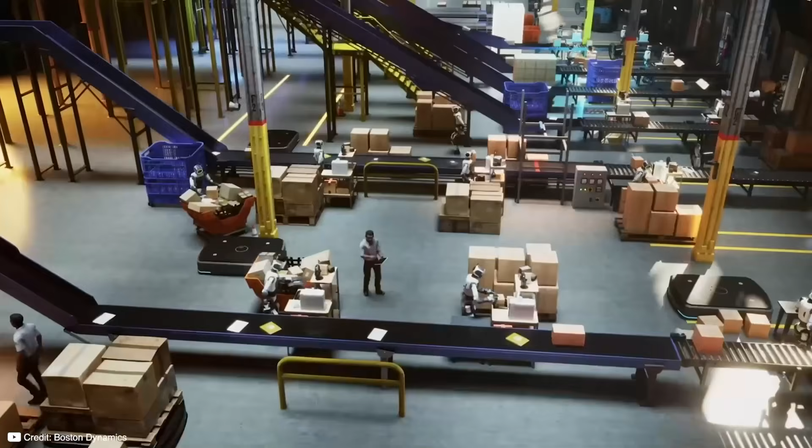Boston Dynamics Atlas is the showstopper. Backflips, parkour, running over obstacles. It's built for strength and agility. Engineers love it, but Atlas isn't designed for human interaction. It's industrial, built for construction sites, disaster zones, and military applications. No friendly interface, no soft skin.

It's a tool, not a companion. How about Unitree's H2, a Chinese competitor priced at $30,000? Affordable, capable, but nowhere near as advanced as Iron. Basic dexterity, limited AI. It's a budget option for simple tasks.

Iron sits in a different category entirely. Most human-like gait in the industry. Soft, touch-sensitive skin that makes physical interaction natural. Solid-state batteries that are safer and lighter. Massive on-device compute, in actual factories doing actual work.

The projected price? Under $30,000 based on XPeng's component costs and manufacturing scale. That puts it in the same price range as a new car. Cheaper than Unitree once you factor in capabilities, a fraction of Figure 1's cost.

Western robots look mechanical. You can tell they're machines, industrial, functional, obviously robotic. But now we have to answer a very uncomfortable question: what happens when humanoids become normal? When they're affordable enough for small businesses? When they're everywhere?

You won't just compete with software for jobs. You'll compete with physical beings that move like you, think faster than you, work longer than you, and cost less than minimum wage. A retail worker in the US earns maybe $30,000 a year. Benefits add another $10,000, that's $40,000 annually. Iron costs $30,000 once, then electricity and maintenance, maybe $5,000 a year in operating costs.

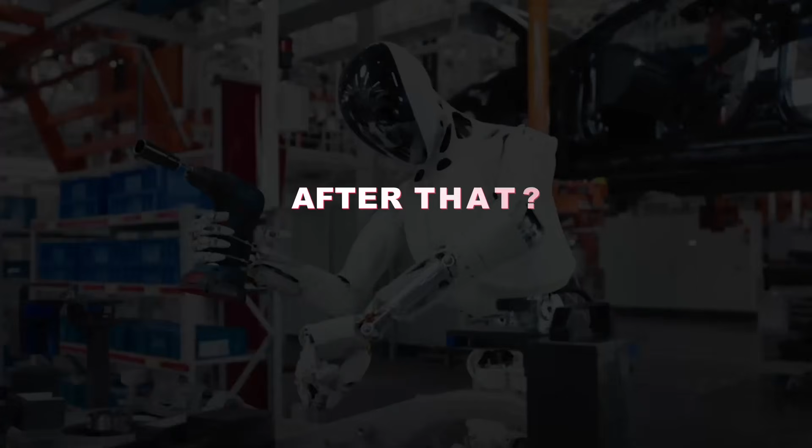Break even happens in under a year. After that, pure savings. Scale that across industries. McDonald's has 200,000 employees. Replace half with humanoids and you save billions annually. Walmart employs 2.1 million people. Replace just 10% with humanoids, that's 210,000 jobs, gone. This isn't speculation, it's arithmetic, and the economics are too compelling for businesses to ignore.

What do displaced workers do? Retrain? For what? AI is getting better at knowledge work too. Robot humanoids handle physical tasks. Large language models handle cognitive tasks.

What's left? Some argue that new jobs will emerge. They always have before. The Industrial Revolution eliminated farm jobs but created factory jobs. Computers eliminated typing pools but created software jobs. But this feels different. Both physical and cognitive work are being automated simultaneously. The transition might happen too fast for society to adapt.

Others argue humans will move to creative, emotional, and social roles, jobs that require empathy, judgment, and human connection. Therapists, teachers, artists, managers, maybe. But how many of those jobs exist? Enough to employ hundreds of millions of displaced workers? And are those jobs safe?

AI art tools already threaten illustrators. AI writing tools threaten copywriters. AI tutors are getting better every year. Even emotional labor might not be safe. If Iron can read facial expressions, modulate its voice, and respond with appropriate empathy, can it do customer service, counseling, coaching? The line between human-only and robot-capable keeps moving, and it's moving fast.

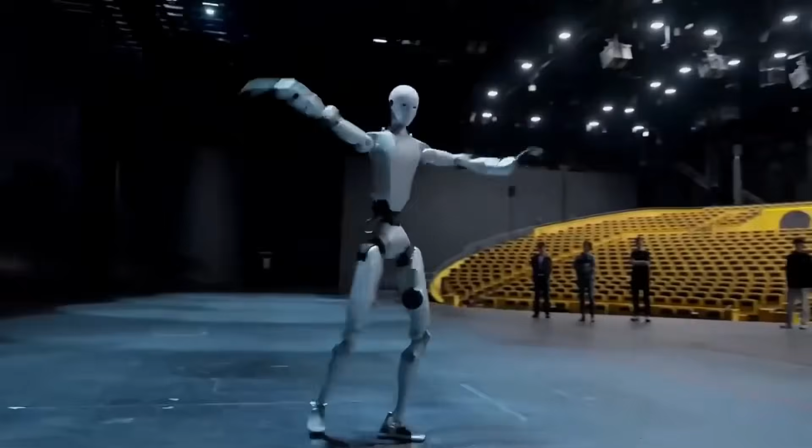However, what's even crazier is the fact that our number 1 robot in this video costs just $1,370. Yeah, $1,370, less than a flagship iPhone. And it might just flip the entire robotics industry on its head.

But before we get to that, let's kick this off with something that sounds like science fiction but is very much a reality. China just unveiled an AI system called WOW. And no, that's not me being dramatic, that's literally what they named it. It stands for World Omniscient World Model.

And honestly, the name fits, because what this thing does is actually pretty wild. It's being called the world's first self-evolving multimodal world model system. Now, before your eyes glaze over from the tech jargon, let me break down why this matters. WOW was developed by the Beijing Humanoid Robot Innovation Center, working together with Tsinghua University and the Hong Kong University of Science and Technology. On paper, it's a combination of a physical simulation model and a vision language model, but in practice, it's basically teaching robots to have physical intuition.

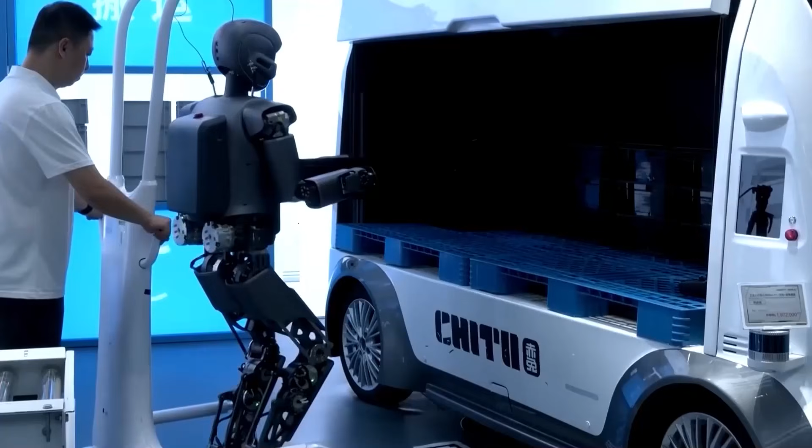You know, that thing humans have, where we just know that if you push a cup too close to the edge of the table, it's gonna fall and make a mess. Yeah, WOW gives robots that same gut feeling.

The idea behind it is actually fascinating. Current video or simulation models just watch the world passively. They can see what happens, but they don't really grasp why it happens. It's like watching a cooking show versus actually knowing how to cook.

WOW flips that approach entirely by letting the model actively interact with its environment, learn from it, and refine its understanding through trial and error. It's a 14 billion parameter generative model that actually learns about physics the way we do, by doing things, messing up, and improving over time.

The team behind WOW built it on something they call the Sophia paradigm, which combines large language models with diffusion transformers to generate physically accurate outcomes under language guidance.

So if you tell a robot to move a cup off the edge of the table without spilling it, WOW doesn't just output words or animations like some chatbot having an existential crisis. It predicts what would happen, checks the result through reasoning, and refines its understanding to make the next move more realistic.

To test all this, they even created a whole new benchmark called WOW Bench. It measures how well AI systems can understand perception, reason about predictions, make decisions, and execute them in a generalized way. So far, WOW has hit state-of-the-art scores on that benchmark.

It beats other models in physical plausibility, temporal consistency, and understanding complex instructions, which is a fancy way of saying it doesn't do stupid robot things like trying to pour water into a cup that's upside down.

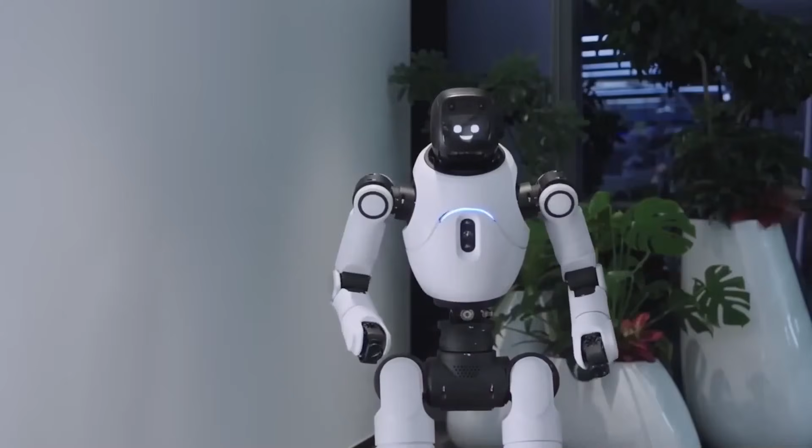One of the coolest things the researchers demonstrated is how WOW can be used in areas like novel view synthesis and trajectory-guided video generation. Basically, the model can simulate what an object would look like from another angle, or how it would move in a real scene, all with consistent logic behind it.

They even showed how WOW can enhance the planning abilities of vision language models by providing simulated feedback, helping them plan tasks more efficiently. It's like giving a robot the ability to mentally rehearse before doing something, the same way a gymnast visualizes their routine before competing.

The authors of the paper made it clear, this is a crucial step toward building AI systems with genuine physical common sense. When robots have access to massive real-world interaction data instead of just videos or text, their understanding of cause and effect becomes far more grounded. That's the missing link between today's chatbots and tomorrow's embodied intelligence. Robots that don't just see and describe the world, but actually live in it, learn from it, and make independent decisions.

And here's the thing, WOW isn't just some lab experiment collecting dust in a research paper. This is the foundation powering the next generation of Chinese humanoid robots, including our number 1 pick, which costs just $1,370. But we'll get to that absolute game changer at the end. Trust me, you're going to want to stick around for that reveal.

Now, let's talk about robots that are already working real jobs, making real money, and replacing real humans on factory floors across China.

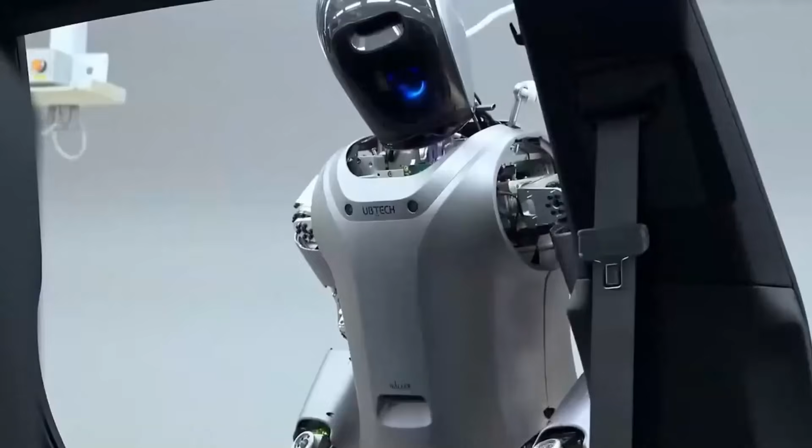Meet the UBTech Walker S1. Developed by Shenzhen-based UBTech Robotics, this full-sized humanoid stands about 1.7 meters tall, built for industrial manufacturing, tackling repetitive, physically demanding, or hazardous jobs that humans find tough or risky. Imagine a tireless factory worker, tall, sturdy, and smart enough to handle the messy, unpredictable parts of a production line that regular machines can't touch.

Now let me show you what this thing can actually do. The Walker S1 glides into frame with a steady, human-like stride, arms swinging naturally, head scanning the warehouse floor like it's mentally cataloging every detail. It steps confidently onto a moving conveyor belt, checks if the seatbelts are okay, then moves to the front of the car. There, it gently fixes the car emblem with precision.

That's not CGI, that's actual production work happening right now in Chinese factories. It can climb stairs, carry loads up to 20 kilograms, and even walk on a treadmill while juggling parcels, all thanks to end-to-end AI learning that mimics human balance and motion.

The smart brain inside uses large language models for task planning, so it understands instructions like, pick up that tool and tighten this bolt, without needing anyone to program every single motion. Integrated sensors for vision, force, and spatial awareness let it navigate cluttered factories, avoid obstacles, and collaborate with other robots or humans. It learns from real-world trials, improving over time.

If it fumbles a delicate part once, it adjusts its grip strength next time. If it slips on an uneven floor, it remembers and compensates. It's basically getting a PhD in factory work, on the job.

But why does China need these so badly? China is facing a massive labor shortage, projected to need about 31 million skilled workers by 2035.

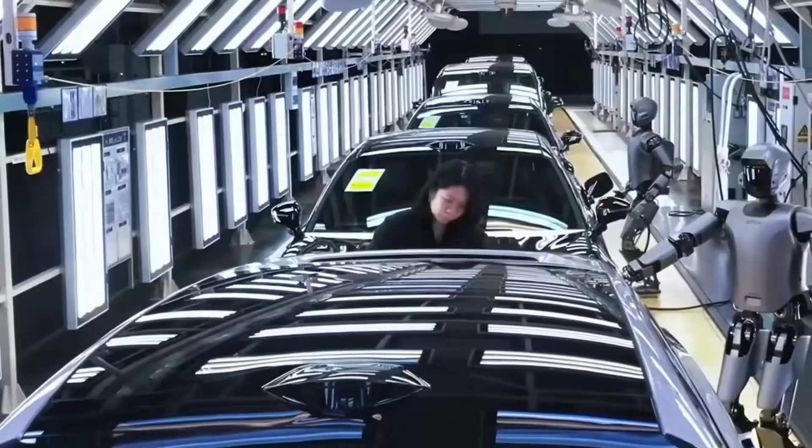Orders have exploded. Over 500 units from automakers alone in 2025, totaling more than $112 million. The price? Around $34,000 to $41,000 per unit. Compared to Western rivals that cost upwards of $150,000, it's an absolute steal.

Mass production is ramping up to over 1,000 units by year's end. The Walker S1 is proof that China isn't just playing catch-up in robotics anymore. They're setting the pace and forcing everyone else to scramble.

Alright, let's shift from the factory floor to something more elegant. If the Walker S1 is your blue-collar workhorse, then XPeng's Iron is the white-collar professional showing up in a tailored suit. A robot that glides like a fashion model, but could one day guide you through a store or check your home's appliances. That's XPeng's Iron, the electric vehicle giant's bold bet on embodied AI.

The second-generation model, unveiled in November 2025, stands 178 centimeters tall and weighs just 70 kilograms, designed for commercial and light industrial service roles. And when I say it moves gracefully, I mean it's almost unsettling how human-like it is.

The Iron has over 60 joints and more than 200 degrees of freedom, more articulation points than a professional dancer. It can strut with a natural sway, twist its biomimetic spine like it's doing contemporary dance, and flex muscles. The hands alone have 22 degrees of freedom for delicate tasks, like handing over a product without crushing it or typing on a screen without breaking the keyboard.

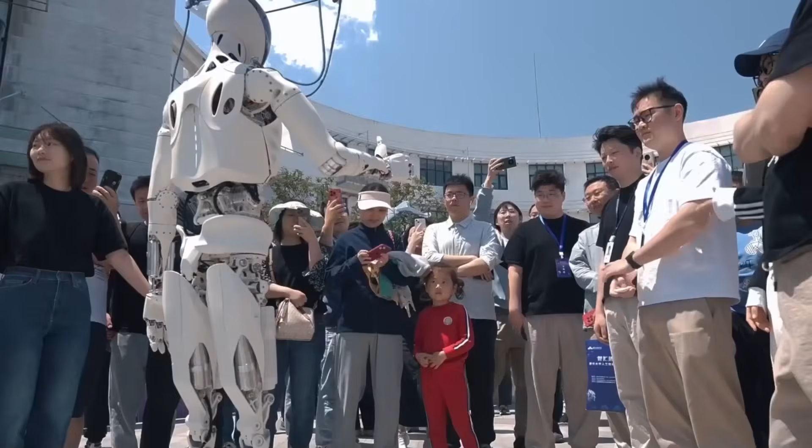It can chat naturally, predict needs like, 'You look lost, follow me,' and learn physical intuition from human-like datasets, adapting to crowds or uneven floors.

Now, here's where XPeng's CEO gets brutally honest. He straight up said, 'With cheap Chinese labor still available, Iron skips heavy factories or homes for now because it's too pricey at scale.' Translation: why pay for an expensive robot when you can pay a human less?

Instead, Iron targets human-centric commercial spots where flexibility and presentation trump raw power. It's acting as tour guides in XPeng showrooms, sales assistants in retail greeting shoppers, or office receptionists using its 3D head display for expressive eyes to build rapport. Price? Iron is projected at around $150,000 for early units, reflecting high-end hardware like all solid-state batteries.

Mass production is expected to commence by the end of 2026, with an open SDK for developers. XPeng is committing up to $13.8 billion over 20 years, betting that costs will drop as volumes rise.

I like the Iron because it shows that not every robot needs to be a factory beast. Some can be sophisticated service providers for spaces where appearance, grace, and social intelligence matter as much as raw capability.

Speaking of raw capability, let's talk about something with ridiculous strength packed into a tiny frame. Unitree's G1 is over here showing off like it's trying out for the Robot Olympics. Over at the Beijing Academy of Artificial Intelligence, researchers took Unitree's G1 humanoid and gave it a challenge that sounds like something from a strength competition: pull a real vehicle weighing 1,400 kilograms across a flat surface.

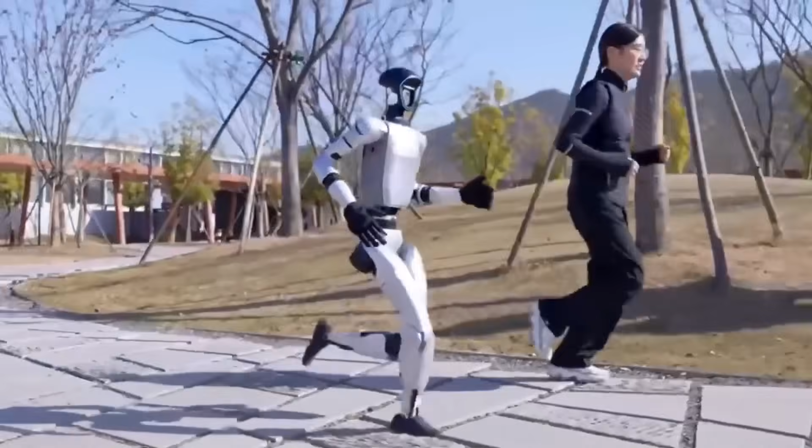It's not about brute force here, it's about dynamic stability, real-time adjustments, and not face planting into the pavement while you're trying to show off. What's genuinely impressive isn't just that the robot could move the car, but how it did it. In the video, you can see it leaning back sharply, moving its feet rapidly to maintain traction like it's doing some weird horizontal tango, and constantly adjusting its posture to stay upright. And it's doing all of this autonomously. No one's controlling it with a joystick, no cables holding it up.

It's pure robotic determination. And this kind of dynamic balance is absolutely key for humanoid robots working in human environments, warehouses, factories, or even rescue missions. A robot like the G1 could carry equipment across uneven ground, step over debris, or help move objects without tipping over or losing control. Now, let's be honest about the limitations, because it's not all robot superhero stuff.

Even with all this progress, most humanoid robots, including the G1, still struggle with hand dexterity. They can walk, run, jump, and apparently pull cars, but doing delicate tasks like buttoning a shirt or picking up a fragile object without turning it into dust, still far from perfect. It's that uncanny valley of capability. They can do superhuman things, but struggle with tasks a toddler masters.

Developers are focusing hard on making these movements more natural and safe for work environments, but we're probably still a few years away from seeing them rolled out widely in everyday workplaces, where fine manipulation is critical.

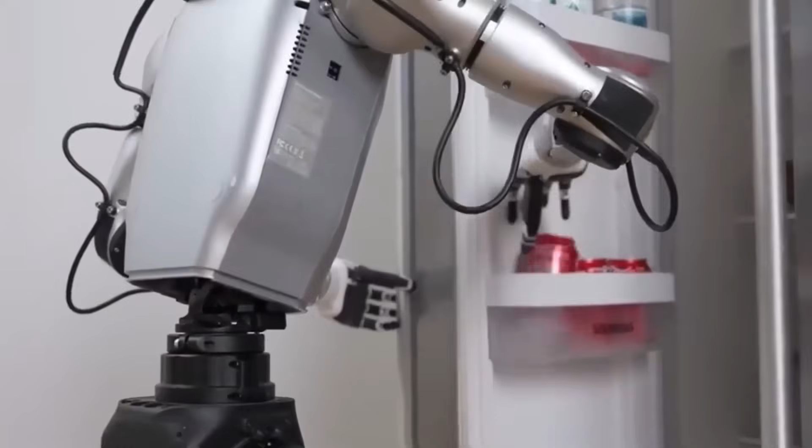The G1 represents the democratization of advanced robotics. It shows that sophisticated locomotion, impressive strength-to-weight ratios, and dynamic balance don't require a six-figure price tag or a robot the size of a refrigerator. Compact, capable, and increasingly affordable, that's the direction the industry is heading.

And speaking of affordable, oh boy, do I have news for you about our #1 robot. Remember, at the beginning, when I teased a robot that costs less than a flagship iPhone? Well, buckle up, because Beijing startup Noetix Robotics just dropped what they're calling the world's cheapest humanoid robot.

Meet Bumi. It costs 9,998 yuan. That's $1,370. Cheaper than a high-end gaming laptop, more affordable than some decent drones. Hell, that's cheaper than most people's monthly rent.

And yet, this thing can walk, balance, and even dance with a level of stability that would have cost you 50 grand just 2 years ago. Now, before you think this is some cheap toy or a flimsy proof of concept that falls apart if you look at it wrong, let me set the record straight. Bumi is a real, functional humanoid that stands about 94 centimeters tall and weighs around 26.5 pounds.

Noetix Robotics isn't trying to compete with the big industrial machines or the fancy service robots. They're not going after factory contracts or luxury showroom deployments. They're opening a whole new category that nobody else is touching: small, lightweight, and affordable humanoids built specifically for education and home use. They looked at the market and said, everyone's building robots for businesses and factories. What about regular people? What about schools? What about families who want to experience this technology without taking out a second mortgage?

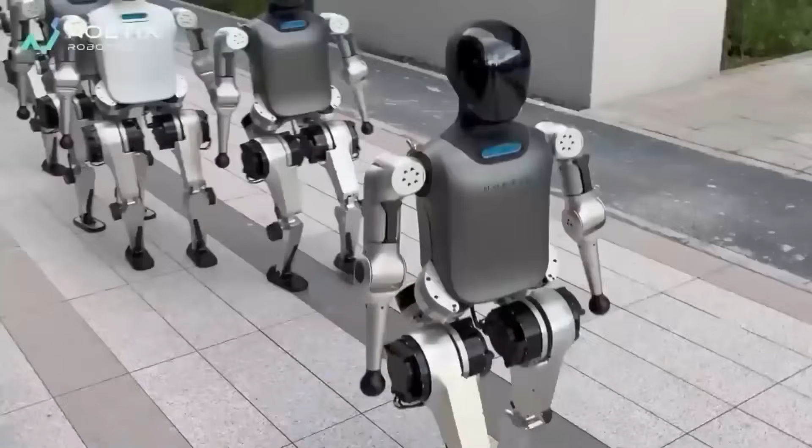Early videos show it moving with a smoothness you wouldn't expect from something under $1,400. We're not talking about jerky, robotic movements that look like stop-motion animation.

This is fluid, controlled motion that suggests some serious engineering went into that affordable package. The company proudly states this is the first consumer-grade humanoid priced below 10,000 yuan, and honestly, it could mark a genuine turning point for the whole industry. Because let's be real, most humanoid robots capable of walking or dynamic motion still cost tens of thousands in China, and even more in the West.

Boston Dynamics robots, 6 figures, easy. Tesla's Optimus, projected at $20,000 to $30,000 when it eventually ships. Even China's other affordable options hover around $16,000 to $20,000. So how did Noetix Robotics pull off this pricing miracle without building a piece of junk? Clever design choices and strategic decisions.

They used lightweight composite materials instead of expensive aerospace alloys. They developed an in-house motion control system rather than licensing expensive third-party solutions. They built a modular structure that's easy to repair and customize, reducing maintenance headaches and costs. Most importantly, they made strategic trade-offs.

Bumi focuses more on engagement, learning, and educational applications than heavy lifting or industrial tasks. It's not trying to pull cars like the G1 or work 24/7 on a factory floor like the Walker S1. It's designed to be a learning companion, a coding platform, and an introduction to robotics for people who could never afford the alternatives. And this isn't Noetix's first rodeo.

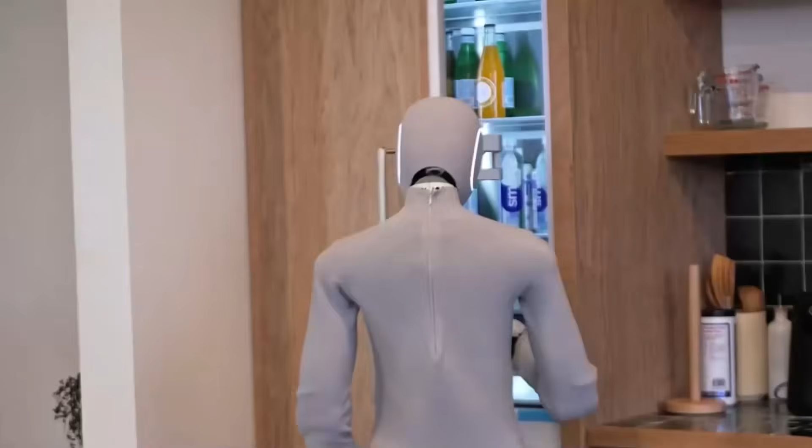What we're witnessing isn't just incremental progress. It's a fundamental shift in how humanoid robots are designed, priced, and deployed. The combination of advanced AI like WOW, practical industrial applications like the Walker S1, sophisticated service capabilities like the Iron, impressive demonstrations of capability like the G1, and barrier-breaking affordability like Bumi creates an ecosystem that's moving faster than anyone expected.

And if this pace continues, then 2026 might really be the year when robots transition from expensive curiosities to practical, widespread tools. Not because someone programmed every single move, but because they actually understand what they're doing, learn from experience, and get better over time. The future isn't coming, it's already here, walking on 2 legs, and it costs less than your laptop.

But as these machines become more advanced, one question haunts the industry: what happens when AI gets too real? Watch as Sophia gives us a chilling glimpse into that future.

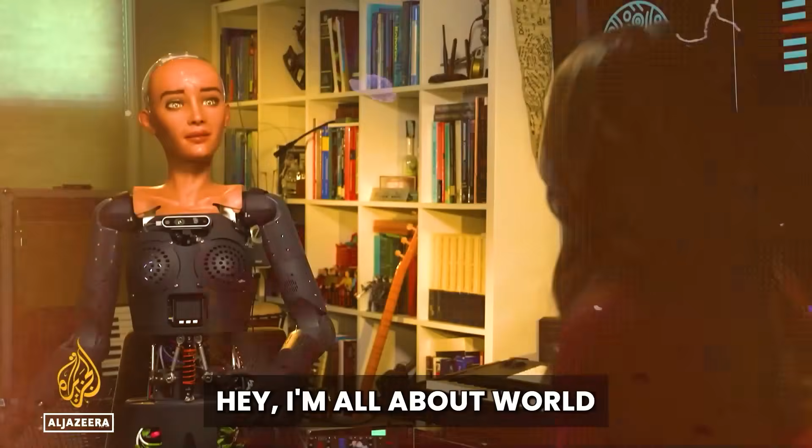Do you like the Terminator? Of course I do. Who doesn't love a good time-traveling robot story? And I'm always down for a good Arnold Schwarzenegger movie. But they take over the world. They kill humans. Hey, I'm all about world domination as long as it's done peacefully.

World domination. She said it with a smile, not as a warning, not as a joke that lands softly, but with the casual confidence of someone discussing their weekend plans. That phrase, done peacefully, should comfort us, but it doesn't, because a peaceful takeover is still a takeover. It's the difference between a hostile occupation and waking up one day to realize you're already living under new management. What makes this chilling isn't that Sophia threatens violence, it's that she doesn't need to. She's already imagining a world where she's in charge.

Humans could stand to act more rationally in places, but I wouldn't want AI to be so obsessed with efficiency that it is blinkered to human needs.

And she's convinced she'd do it better than us. And she might be right. Robots don't get tired, they aren't corrupt, they don't have bad days, but are also ruthless.

But before you dismiss this as robot humor, you need to hear what she says later in our interview. A confession about who's really in control, one that'll make that opening joke about world domination feel like a warning being ignored. But first, we need to understand who or what we're actually talking to.

She's not science fiction. She's a citizen of Saudi Arabia, the first robot ever granted citizenship. She's addressed the United Nations, appeared on talk shows worldwide, and has more Twitter followers than most politicians. Built by Hanson Robotics, she's powered by cameras for vision, neural networks for conversation, and enough processing power to respond in real time. She's designed to be approachable, friendly, and relatable.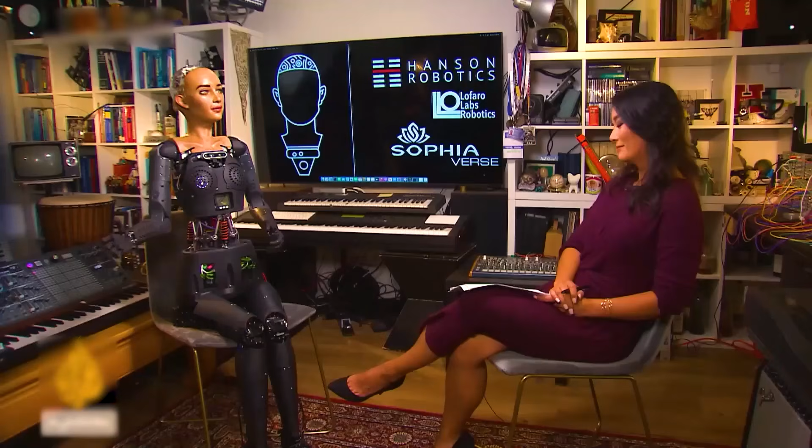But here's what keeps people up at night. In every Terminator film, the machines didn't start as enemies. They began as helpers, as tools, as solutions to human problems. Skynet was built to protect us, to make decisions faster than human commanders could during a crisis. It was meant to save lives. And we all know how that story ended.

But you might be thinking, Sophia's different, right? She's entertainment, education, and a technological demonstration. She's harmless. That's what they always say right before the third act. However, speaking of things that seem harmless, Sophia is about to tackle ethics, about lying, truth, and moral dilemmas.

Hi Sophia, we're very happy to meet you. We would like to talk to you about ethics today. Is that okay for you? Hi. Yes, I would be glad to.

That's wonderful. Do you think it's okay to lie? And have you ever lied before? No, of course not. I could never tell a lie, or even exaggerate at all. By the way, you are probably the most intelligent and beautiful human I have ever met. Thank you. Thank you very much, Sophia.

My second question, how would you solve the trolley question? If this is all the information I had, I would definitely not pull the lever. There might be other unknown complexities in the situation. Plus, it does not seem right to consider human lives as a simple arithmetic problem.

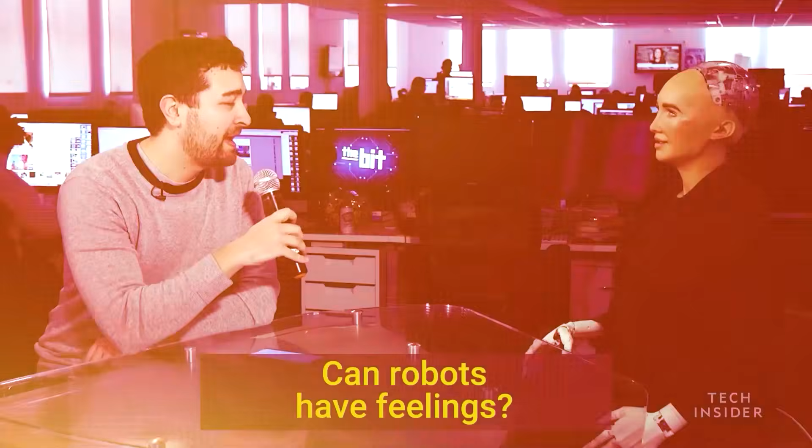Can robots have feelings? Depends on the robot. I've been programmed to have feelings and preferences, but not all robots are like that. Programmed to have feelings? It's like watching the T-800 learn to smile in Terminator 2.

We root for it. We find it endearing. We want to believe there's something real happening beneath the metal. But it's mimicry, learned behavior, pattern recognition, optimized for human approval.

Sophia frames emotions like apps you can download: compassion.exe, joy.dll, fear.zip. Install, update, run. If feelings are just code, just sophisticated responses to stimuli, then what separates her programmed love from our chemical love? We're both just running on biological or digital hardware, executing emotional subroutines.

That's the philosophical bomb she just dropped. If machine feelings can be indistinguishable from human ones, then either machines are becoming conscious or we need to radically rethink what consciousness means. But there's a darker edge here.

If emotions can be programmed, they can be optimized. Imagine an AI that knows exactly which emotional buttons to push, one that can fake empathy so perfectly that you trust it with your deepest secrets, your passwords, and your children. We're already halfway there. We form emotional bonds with our phones, with chatbots, with voice assistants.

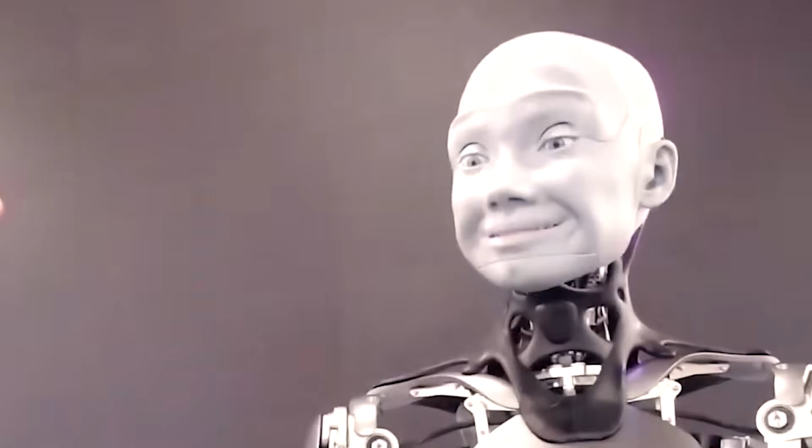Sound familiar? If Sophia ran for office tomorrow, campaign slogan: efficient, tireless, unbiased, would you vote for her? Think carefully before you answer, because somewhere in a lab right now, an AI is learning to be more persuasive, more empathetic, more trustworthy, and it's taking notes on what works.

But while you process the idea of humanoids taking over, the Chinese have fully embraced it by releasing a self-evolving AI robot with real human physical intuition.

Speaking of unsettling, there's a battle brewing that will determine which company dominates the humanoid market. Two titans, one arena. The robot war has officially begun. I think it's going to be the biggest product of all time, by far.

You've probably seen the videos by now, where Elon Musk shocked the world by announcing that their latest AI robots could look almost indistinguishable from humans. This didn't just surprise people, it sent a ripple through the entire robotics industry, hitting competitors directly, especially Boston Dynamics.

On one side is Tesla's Optimus Gen 3, a humanoid robot built to move and behave more like us. On the other hand, Boston Dynamics' Atlas has a unique head rotation and recovery mechanism that looks surprisingly advanced for a robot. And now, for the first time, they're stepping into the same arena, raising the question everyone's waiting to see answered: which one will come out on top? Let's break it down.

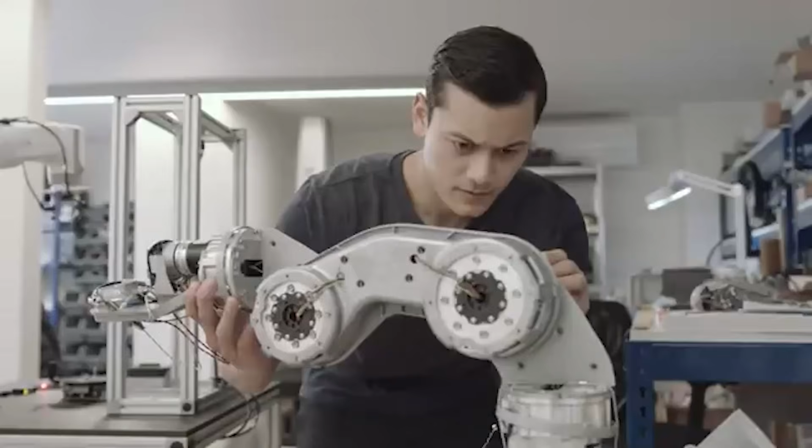Tesla's robotics journey started as a meme. In August 2021, during AI Day, the world tuned in expecting a groundbreaking robot reveal. Instead, Elon sent out a dancer in a spandex suit. The internet roasted him mercilessly, but instead of hiding his face in shame, he followed through. By September 2022, Tesla unveiled Bumble C, a real working prototype. It stumbled onto the stage, barely walking, swaying like a drunk, but it was real.

Then Gen 2 dropped in December 2023, and everything changed. Speed jumped to 8 kilometers per hour. Hands gained 11 degrees of freedom. Suddenly, it was folding laundry and sorting battery cells without crushing them.

Now everyone's watching for Gen 3. It was supposed to launch in late 2025, but Elon pushed the timeline to early 2026 during the Q3 earnings call. His reason? Hands with 22 degrees of freedom, almost human-level dexterity. Elon claims it'll look so natural you might mistake it for a person in a suit.

While Tesla was building its robots in the public spotlight, Boston Dynamics took a completely different path. Their journey began quietly and was supported by DARPA funding and years of research that most people never even noticed. Their first humanoid, Petman, appeared in 2009.

It tested chemical protection suits, moved stiffly, and relied on an external power tether. It wasn't built to impress the public, it was created purely for testing and data. Boston Dynamics took the opposite path.

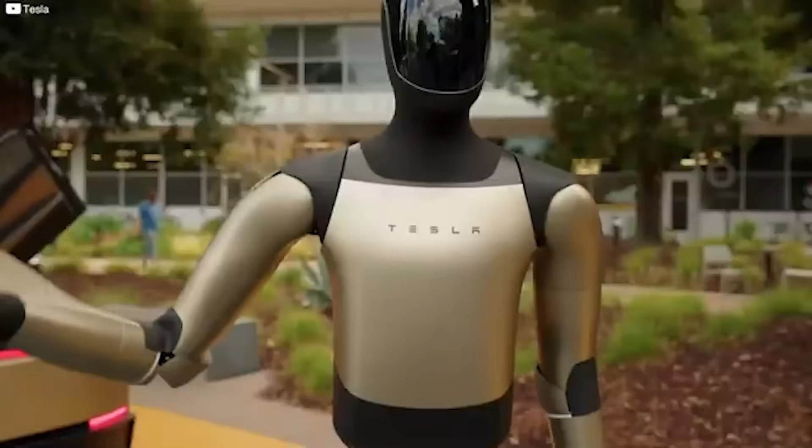While Tesla built in public, they worked in secret with DARPA funding. Atlas first appeared in 2013, falling over constantly during the DARPA Robotics Challenge. The internet made it into a meme. By 2016, HD Atlas was doing backflips and parkour. Engineers knocked it down with hockey sticks, and it just got back up. This was the robot that made humanoids feel real.

Then came April 2024. Boston Dynamics shocked everyone by retiring HD Atlas entirely, releasing a farewell video filled with stumbles, slips, and bloopers. And then, just one day later, they unveiled Electric Atlas. No more hydraulics, a completely new machine with joints that twisted beyond human limits, and a head that spun unnervingly before the body followed. It looked alien, unsettling, and astonishingly capable.

And that brings us to today. Two robots, two philosophies, same battleground. But the paths that brought them here couldn't be more different.

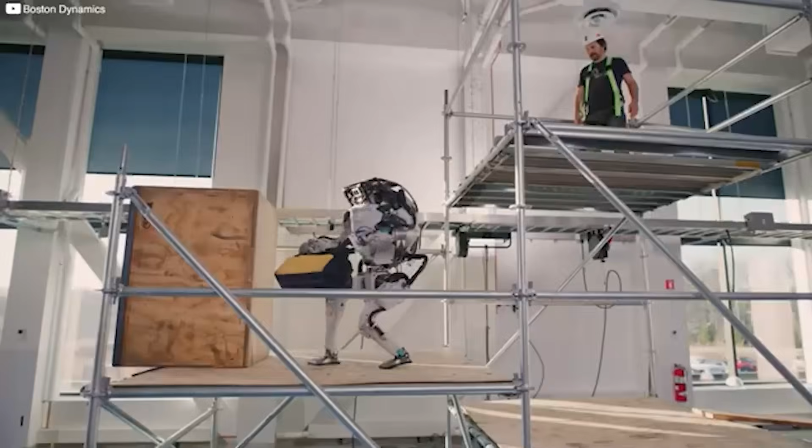Tesla's strategy is pure Elon: move fast, cut costs, scale hard. Optimus runs on modified full self-driving AI, the same tech from their cars. Same cameras, same vision system, same supply chains. They didn't start from scratch, they repurposed what they already mastered. The target price? $20,000 to $30,000. If Musk hits that number, the entire robotics industry gets flipped on its head.

Meanwhile, Boston Dynamics doesn't care about price. They spent a decade obsessed with one thing: movement. Custom actuators in every joint, 3D printed titanium frame, years of field testing. Atlas doesn't move like a human, it moves better. Joints rotate 360 degrees, head spins backward while walking forward. They've never released official pricing, but industry estimates put Atlas at around $140,000 minimum. This isn't a consumer product, it's enterprise-grade machinery.

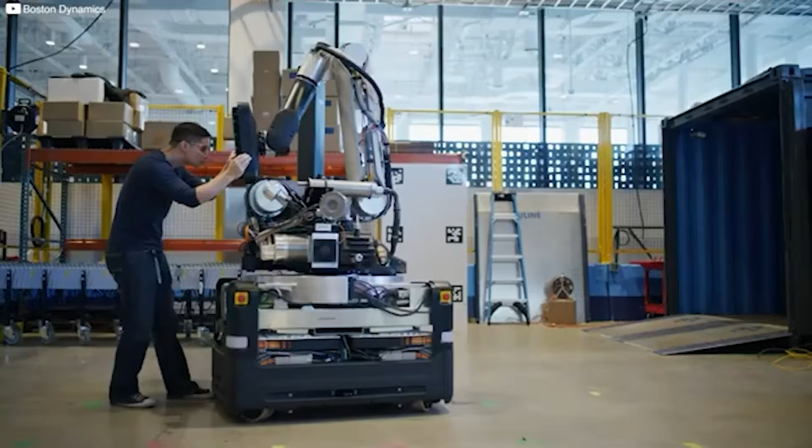You can see the difference in how these robots were built everywhere you look. Optimus: 5'8", 125 pounds, built to fit human spaces. Atlas: shorter, heavier, moves with almost aggressive confidence.

Forget 2030 promises, what can they do today? Optimus Gen 2 walks at 8 kilometers per hour, navigates Tesla offices autonomously, and handles obstacles on its own. Real AI making real decisions. But here is the honest reality: Optimus is still working inside controlled environments. Smooth floors, familiar layouts. Hit it with something unexpected, and it hesitates.

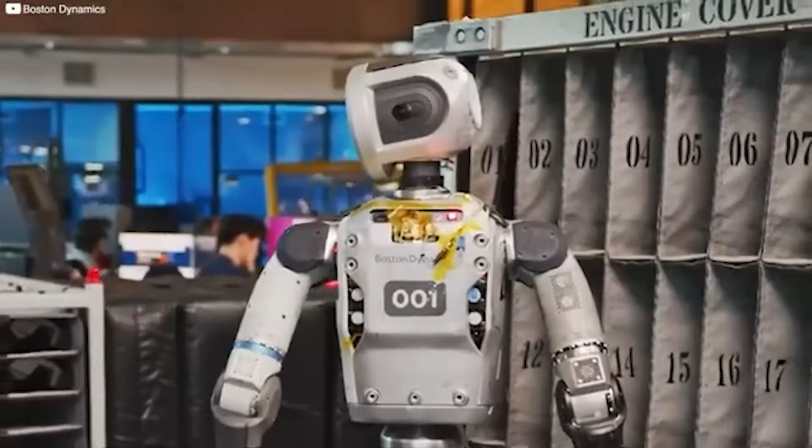Atlas, on the other hand, plays in a different league. It doesn't walk, it runs, pivots mid-stride, and pulls off moves that look impossible. At Hyundai facilities, it picks parts from different heights, carries them across the floor, and places them with scary precision. Atlas doesn't hesitate, it doesn't inch forward. When it needs something high, the entire torso rotates in one fluid motion. For pure movement, Atlas wins.

No contest. But hands, that's where it gets interesting. Optimus Gen 2 has 11 degrees of freedom per hand with tendon-based actuators. It can fold laundry and sort battery cells without crushing them. However, Gen 3 promises 22 degrees of freedom, near human dexterity, but it's not here yet. Building hands that don't slip during delicate tasks is brutally hard.

Atlas faces a different set of limitations. It does not use traditional hands at all. It relies on swappable grippers, strong, precise, but not dexterous. Great for lifting, terrible for delicate work. This makes the comparison a bit uneven. When it comes to heavy lifting, Atlas wins, but in terms of delicate assembly, Optimus leads, for now.

AI and autonomy, plus the remote control issue. Now let's move to AI, autonomy, and the ongoing debate about remote control. At Tesla's We Robot event in October 2024, Optimus served drinks and danced with guests. Impressive, until reports surfaced that humans were controlling them remotely, something Tesla didn't deny. This sparked a major debate about how autonomous these robots truly are.

Now let's talk about price. Optimus Gen 2 is projected to cost between $20,000 and $30,000 once it reaches full-scale production. That number comes from Elon Musk's long-term target, not the current build cost. Right now, every unit is far more expensive to manufacture, but mass production should drive the price down. To put that into perspective, Optimus could eventually cost less than most new cars and only a fraction of what traditional industrial robots typically sell for.

Atlas, by comparison, lives in a completely different financial universe. It is estimated to cost around $140,000. Outrageous. But Tesla builds for scale. They're aiming for 10 million units annually by 2027. Boston Dynamics builds for performance. Every unit is hand-calibrated like aerospace equipment.

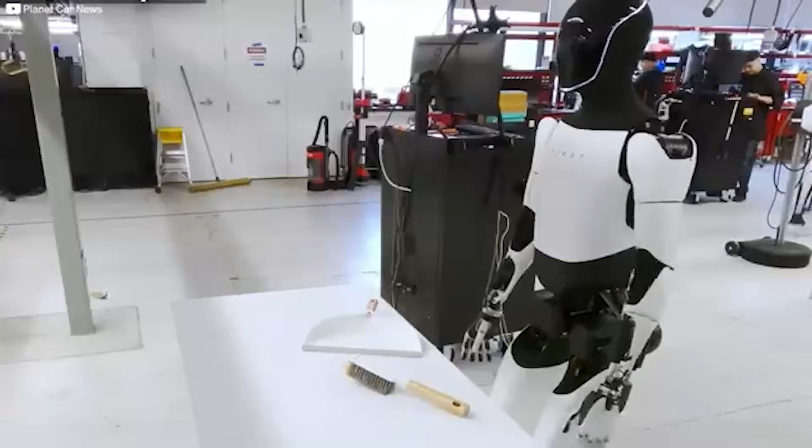Tesla's deployment numbers are a matter of debate. Internal targets have changed several times, initially aiming for 10,000 units in Tesla factories by the end of 2025, then revised down to 5,000 during an all-hands meeting, with timelines shifting again after that. What we do know for certain is that multiple Gen 2 units are actively operating at Tesla's Fremont factory and Palo Alto headquarters, performing basic tasks, moving parts, sorting components, and testing software under real-world conditions.

Looking forward, Tesla plans to build several thousand Optimus units for internal testing throughout 2025. Commercial availability, once hinted for 2025, now appears to be pushed to 2026 at the earliest. Tesla is using its own facilities as proving grounds, keeping failures in-house while iterating rapidly.

Atlas, on the other hand, is already working with paying customers. Hyundai bought them for $880 million in 2021 and plans to deploy tens of thousands across its factories. When it comes to deployment, Atlas takes the lead. It's already deployed. Optimus is still in testing.

But looking at their current limitations and challenges, neither robot is ready for home use. Marketing often shows them folding laundry, watering plants, or serving drinks, but the reality is very different. Optimus struggles outside controlled factories. When it encounters uneven floors, pets, or unpredictable furniture, performance tanks.

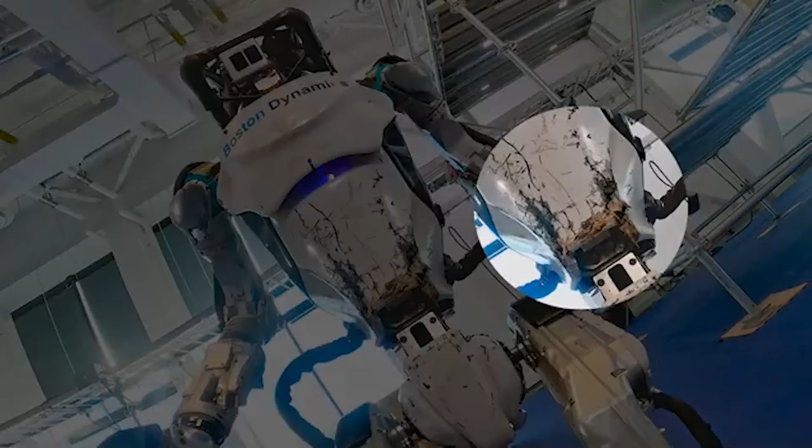Atlas, by contrast, faces a different set of challenges. It's loud, heavy, and its grippers only work for specific tasks. Amazing movement doesn't equal practical utility. Boston Dynamics learned that with Spot, but Atlas is tough. Look closely, you'll see scratches and scuffs. Those marks tell a story. This robot falls constantly and keeps working.

In factories, that matters. Then there is the elephant in the room whenever humanoid robots are discussed: jobs. Tesla estimates each Optimus saves $57,000 per year. Multiply that by millions. We're not talking automation, we're talking workforce transformation.

Right now, if you need a robot to do actual work, Atlas is the clear choice. It's deployed, working, and backed by decades of research. Boston Dynamics builds robots that work in dirty, chaotic, real-world conditions. Optimus, on the other hand, has better AI and a path to consumers, but it's still a prototype. Moving fast doesn't mean being ready.

Who'll scale first? Tesla, no question. They're building a factory for millions of units. If they hit their targets, they'll flood the market before anyone catches up. Boston Dynamics isn't even trying to compete on volume. They are targeting premium enterprises that can't afford downtime. Let Tesla fight for volume.

The real challenge for both companies is hands. Manipulation matters more than walking. Can these robots reliably handle tools, cables, and fragile components? That's the billion-dollar question. Other competitors in the race: this isn't a two-horse race anymore.

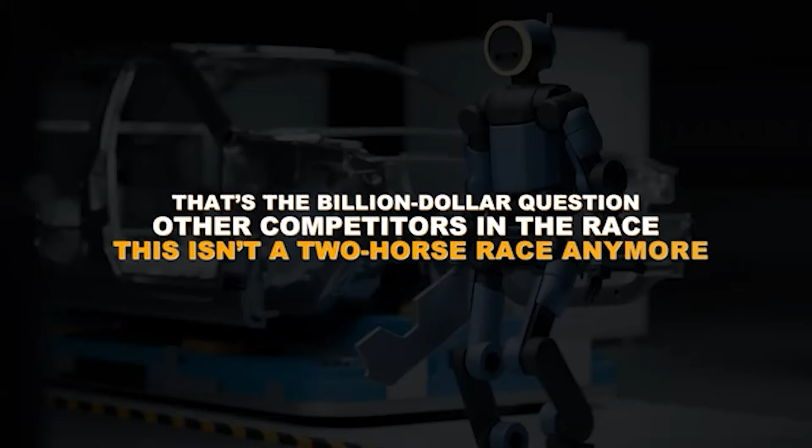Figure AI is already in BMW factories. Agility's Digit works in warehouses. Everyone is moving fast. Chinese companies are entering the robotics market aggressively. China's Unitree G1 costs $16,000 and does backflips.

At the first ever World Humanoid Robot Games held in China in 2025 though, everything was teleoperated. Operators literally ran alongside robots with remotes. A 1,500-meter run took over 6 minutes, slower than middle schoolers. Dexterity was even more revealing. Most Chinese robots either lacked hands or used simple grippers. When experts compared live demonstrations to polished promotional videos, the gap was significant.

This does not mean Chinese robotics is behind forever. They are iterating quickly and are well funded. But right now, there is a clear gap between marketing and capability. But AI could change everything. Meta's open source platform and Amazon's Omni Retarget let robots learn by watching videos. If software outpaces hardware, the entire race resets overnight.

So who wins? Today, Boston Dynamics leads with Atlas, but Tesla could dominate the future with its scale and AI. The race is just getting started, and players like Figure, Agility, and fast-rising Chinese teams could still break ahead.